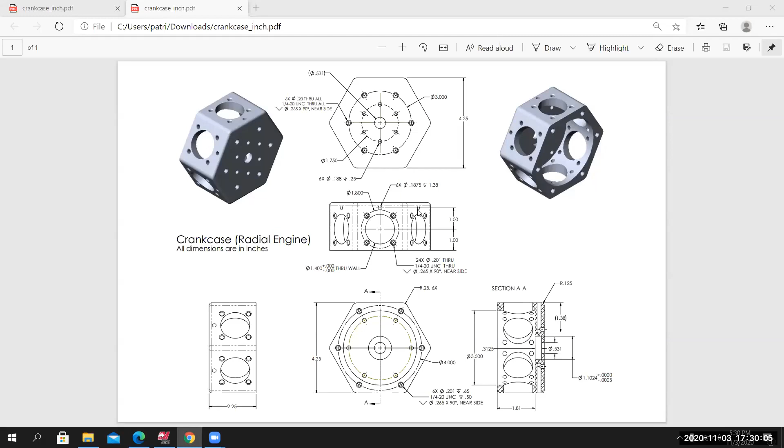So on my screen, I have the drawing for the crankcase radial engine, and I'll be toggling back and forth between the Mastercam file. This is at the stage or the level of completion where we left off. And just to get an idea where we are, I will run the part and verify. You can see I have one stock model and one toolpath. So I'll select the entire toolpath group. You see checks next to the stock model and the toolpath, and I'll run it and verify.

And you'll notice that you don't see the soft jaws inside of verify, or you don't see the fixture inside of verify. And that's probably something that we should bring in just in case we have a collision between the tool and the soft jaw or the tool and the fixture. Verify would be able to point that out for us. So I want to take advantage of that. So I'm going to back out of verify.

And to have these two soft jaws show up inside of verify, here we have the verify icon. To the right of it, simulator options. Click on simulator options. Then it brings up this dialog box. Towards the bottom, you'll see fixtures. Check fixtures. And you'll see it says levels. You want to check the levels where your fixtures or your work holding reside. And in our case, soft jaws.

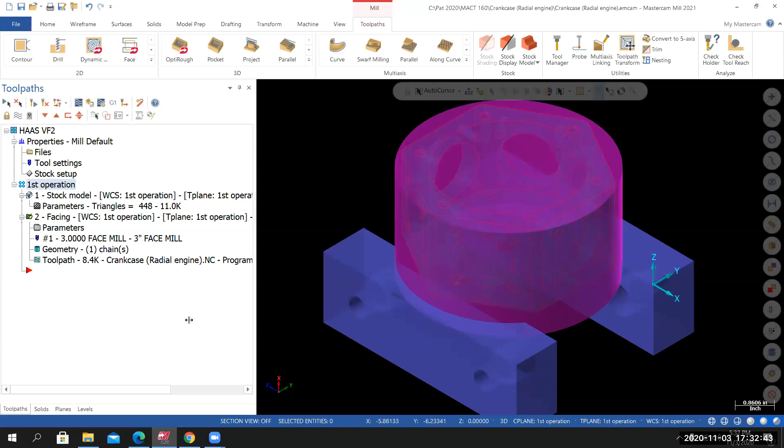All right, nice. Okay, so the next thing that we're going to do is machine the outside profile. And for the time being, I'll make the material level invisible. That way I can easily access the geometry on the part itself. And once I select the chain that I need to drive this toolpath, I'll make the material level visible again. So we're going to use a contour toolpath, and we're going to machine the outside profile.

I'll select it here. I have a question. Yes, sir. Should we make our stock model first? Yeah. Oh, thank you very much for pointing that out. So last class we left off with the toolpath. We didn't create the stock model that reflects the facing operation. So thank you for pointing that out. Let's do that. So I'll go back to the toolpath manager. We've got a stock model that reflects the material prior to machining. Let's make one that reflects the facing operation.

So to do that, go up to the toolpath tab. Select stock model. And for the name, let's call this facing operation. Stock plane, leave it at the top. And for the initial stock shape, we have a stock model that represents our material. So I'll select stock model. And the only stock model that's currently available is the raw stock. From here, I'll go to source operation, and I'll select the toolpath that's actually machining the stock model. So in this case, I've selected the facing operation. I'll select OK.

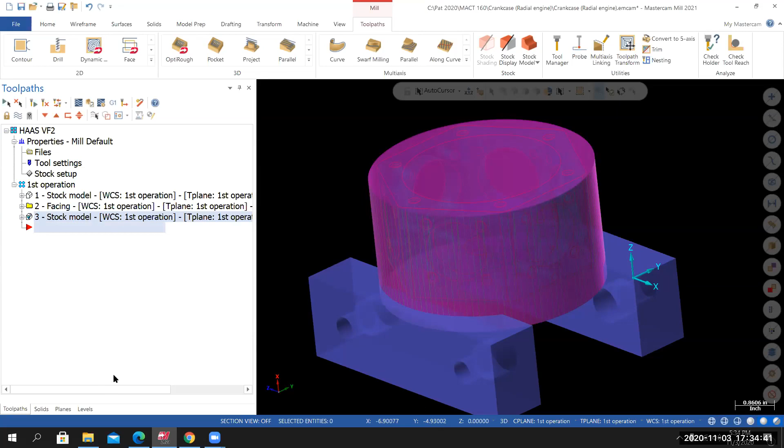Now it's difficult to see because the solid that represents our material is currently visible. It's overlaying the stock model. So if I go to the level manager, make the material level invisible, and I still have translucency turned on, so for the time being, I'll turn translucency off. And you can now see that this gray representation of our material, that's our stock model. So I'll go back to the toolpath manager. With the stock model selected, I can select toggle display. And this would be a good time to save my work.

Thanks, Josh. Thank you. How's everyone doing? All right. Good. Nice.

All right. So from here, let's machine the outside profile, and we're going to use a 1-inch flat end mill. We're going to rough and finish. This is aluminum. We're going to rough and finish with this 1-inch flat end mill. So we'll go to toolpaths. We'll go to 2D toolpaths, and we're going to select contour.

And I'm going to select the outside profile right here. And right now I've got solid chaining turned on. I could use solid chaining, but I'm going to change back over to wireframe chaining. So wireframe chaining, the mode is set to C-plane, and then the selection method is chain.

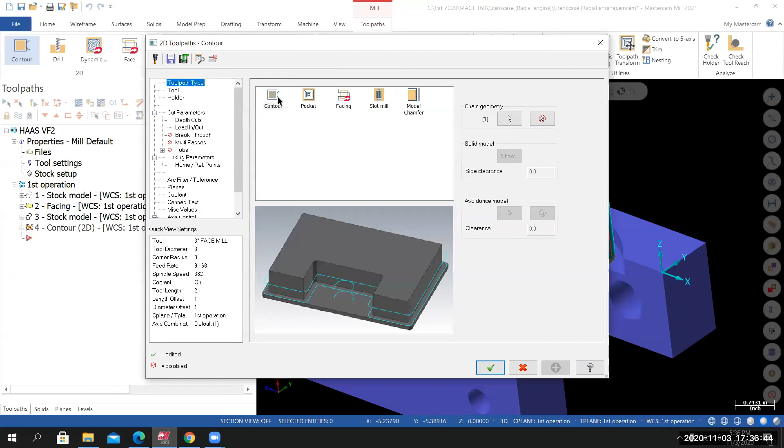From here, go to Tool. We're going to add a 1-inch flat end mill to our tool list. So I'll go to Select Library Tool. The filter is currently active, so I'll select Filter. And I'm going to deselect all tool types and then select flat end mills and set the tool diameter equal to 1. I hit enter.

I'll select OK. And I've got one tool that fits that description. It's tool 297 coming out of the library. When I double click on it, it should be added to your tool list as tool number 2.

How's everyone doing? Good. Doing good? Okay.

We'll need to edit this tool definition. To do that, right click on it and then select Edit Tool. Under the tool geometry page, I'm going to accept the defaults. And I'll just remember that the shoulder length, this is what I'm going to use as my tool projection when I bring in a tool holder. So shoulder length is 2.5. I'll set my tool projection to 2.5. We'll go to the next page.

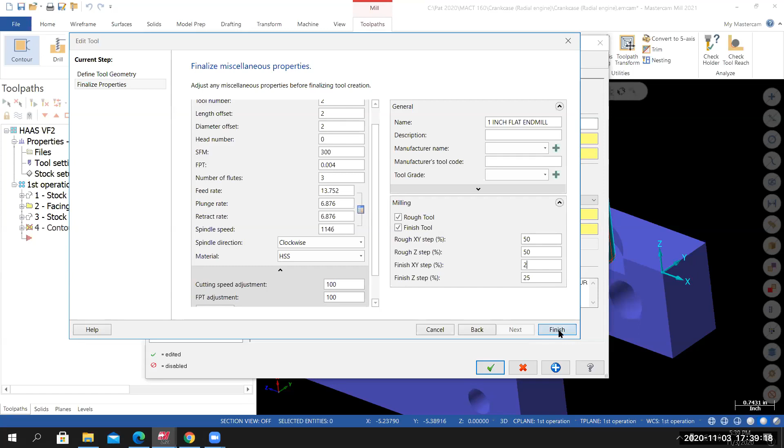For the finish XY step percentage, set this to 2%. And just to recap what we did, we set the number of flutes to 3, we calculated the RPM, we turned the coolant on, and then changed our finish XY step percentage to 2. From here, I'll select Finish. That brings us back to this page.

The RPM is good, but we'll need to adjust the feed rate. Let's set the FPT equal to 1% of the tool diameter. So for the FPT, 1 times 0.01 is 0.01. It's calculating my feed rate at 34.38. Set the plunge rate to half the calculated feed rate. So 34.38, divide that by 2. And also change that up. So I've got my feed rate, my plunge rate calculated.

For the comment, I'll borrow the tool name. I'll paste it down here. Then I'll provide some type of useful information. We'll say machine. And this could be all caps. Once it gets converted into an NC file, it's going to be all caps anyway. So let's keep my caps lock on. Say machine outside contour. And I've got rapid retract checked. And that'll complete everything we need to change on this page.

How's everyone doing? Pretty good. Good. Thank you.

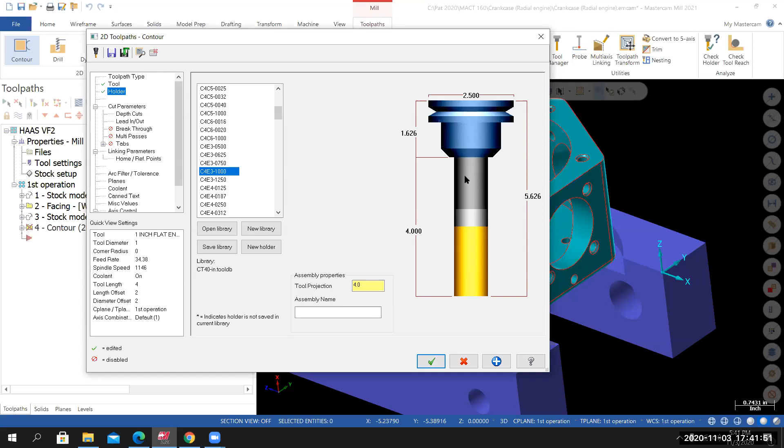And we're looking for a solid type tool holder. So this will be a C4, I'm guessing an E3-1000. So C4 E3-1000. This will be a solid type tool holder. It'll have a set screw right here, and the set screw will need to land on a flat that's ground onto the shank of the tool. For the tool projection, set it to 2.5.

And something I didn't check, and I should have checked: the cut length of this tool. I have a question. Yes, sir. How do we know our tool holder is not going to hit the top of our part? That's what I'm thinking about right now. I didn't check the cut length.

Now I'm throwing it in reverse, and I'm thinking the cut length needs to be greater than the length of the part right here. And if all else fails, we missed it, hopefully we would catch it in backplot, and we would definitely catch it in verify. So let's back up a little bit. Well, first off, we got a couple of things that we can check. Here's the drawing.

I'm in the middle of something, so it's not letting me go there. I'm looking at the drawing on my other screen. The thickness of the part is 2 1/4. So let's go back to the tool, edit the tool. And you see the cutting length? We're going to come up short. So we're going to have to order a special tool for this. We're going to need a greater length of cut. And without looking at a tool catalog, I can only guess.

So let's do this. Let's set the cutting length to 2.5. And then let's set the overall length of the tool to 5. Now, what you would need to do is look this up in a tool catalog and get the exact numbers before you fill all this information out. I'll set the shoulder length to 3. And this will become our tool projection right there. So the tool projection will match our shoulder length. These numbers I pulled out of the air. What's important is that the cutting length is greater than the depth of the contour.

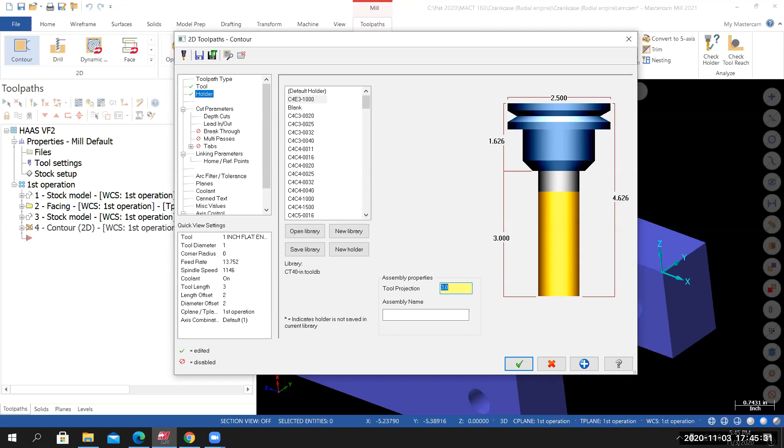Manuel, you good? Yeah. Okay, cool. I'm getting a lot of background noise from you, so I'm muting you. Oh, yeah. Okay. So don't take offense. I'm just muting you because I'm getting a lot of background noise. But if you got a question at any moment, unmute yourself and feel free to ask. Okay, definitely. Okay, thank you.

All right. So from here, we're on the cut parameters page. Compensation type, we're going to use wear in this class. For the compensation direction, we use cutter comp left. We'll accept the defaults here. I'll check real quick. Make sure contour type is set to 2D. And then go down to stock to leave on walls and stock to leave on floors. We'll set these values to 0. We're going to machine right up to the model. So that'll complete this page.

We'll go to depth cuts. I've got depth cuts turned on, and the default setting that we're using, remember when we checked use tool, step, peck, and coolant? So the maximum rough step down is 50% of the tool diameter. So in this case, 1/2 inch. And I've got keep tool down checked. This will prevent it from retracting to our clearance plane after each depth of cut.

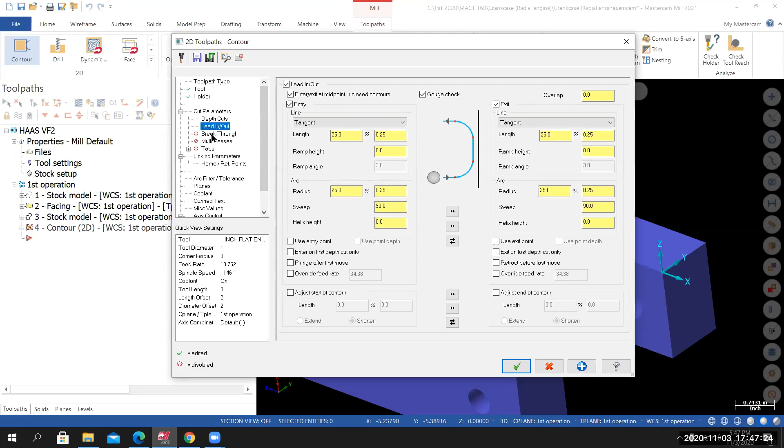So from here, I'll go to lead in, lead out. These are my default settings, 25% for the line and the arc on the entry and the exit. So this page is good. I could turn breakthrough on, and that would just tell it to go slightly beyond what we identify as the bottom of the part. Doesn't hurt. So let's add 20 thousandths for a breakthrough.

For multi-passes, let's activate multi-passes. Let's set our number of finished passes to 1. The spacing for our finished pass is 20 thousandths. That's coming from that XY step over percentage that we set back in the tool settings.

And I'm also going to check machine finish passes after, let's see here. Keep tool down, machine finish passes after roughing all contours, machine finish passes. Oh, right here. So finish passes. This is a slight change with this release of Mastercam. Now where it says finish passes, it's a drop-down menu. I'll set it to final depth.

So it's going to do several depths of cut, intentionally leaving 20 thousandths on the walls. And then when it gets to its final depth of cut, it'll do one rough pass. And then it'll go in and it'll do one final pass where it removes the 20 thousandths all in one shot. From here, I'll also check keep tool down.

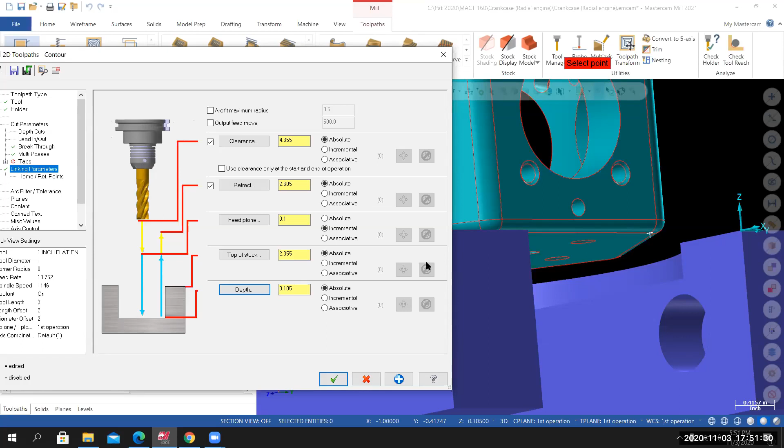And you can see that the bottom of the part is 105 thousandths above the top of the vise. So we need to be careful. We want some clearance between the part and the vise. We don't want to machine into the vise. Just remember, we did use a breakthrough of 20 thousandths. So in reality, the Z position will only be 85 thousandths above the top of the jaw, which is still plenty of clearance. Just be aware of it. So from here, I'll select OK.

I'll look at it from an isometric view. And with just this toolpath selected, I'll run it in backplot. There were some issues with the tool holder, so let's make the tool holder visible. And if I hit the S key repeatedly, I can single step through the whole process.

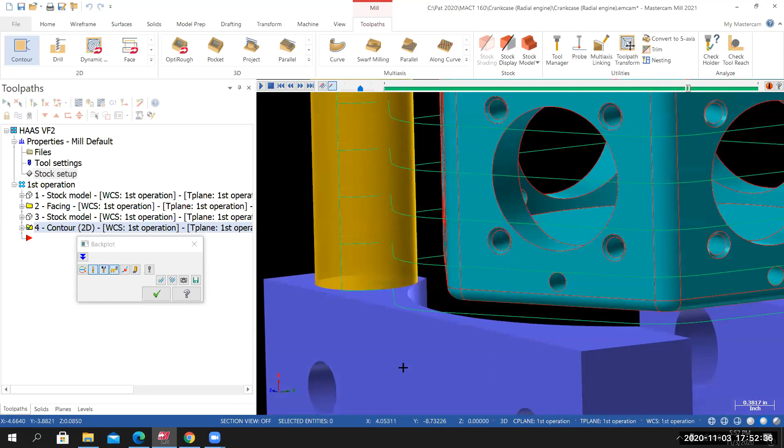So it's making these roughing passes, and it's intentionally leaving 20 thousandths of material on the wall. And there's our third depth of cut, there's our fourth, and there's our fifth. And this one brings us 85 thousandths above the top of the jaw. It'll do one roughing pass, and then it's going to reposition itself and go in for one finish pass at the final depth of cut. And you can see that it's stepping 20 thousandths closer to the part. And then it retracts away from the part.

So I didn't see anything out of the ordinary. I'm not seeing any green lines or feed moves or rapid moves going through the vise or the part. So I'll exit out of backplot. I can toggle off the visibility of the selected toolpath. I'll select toggle display. I'll look at it from an isometric view. And this would be a good time to save my work.

How's everyone doing? Good. Okay. Nice. No issues? Nothing I can help resolve?

All right, so from here, I save my work. Select the entire first operation toolpath group, and then run it in verify. Stop condition collision is still turned on. And then I'll select play.

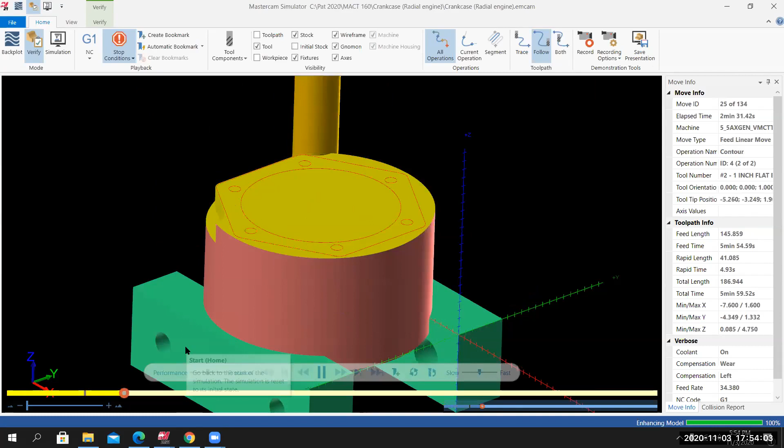Looks good. I'm comparing the machine model to the wireframe representation of the part. If I zoom in down here, you can't see the geometry that represents the bottom of the part. So I'll change over to a translucent view real quick: where it says visibility, select stock, and it goes from a check to a square in this box. Now, if I look at it from a front view

and I zoom in, here is the bottom edge that we machined to, and here is the bottom of the part. So there should be a 20 thousandths gap between the two. We told it to break through 20 thousandths. And that's okay as long as we don't cut into the jaw of the vise. Even with soft jaws, if you cut into them, it's just a mess. So try to avoid running into them.

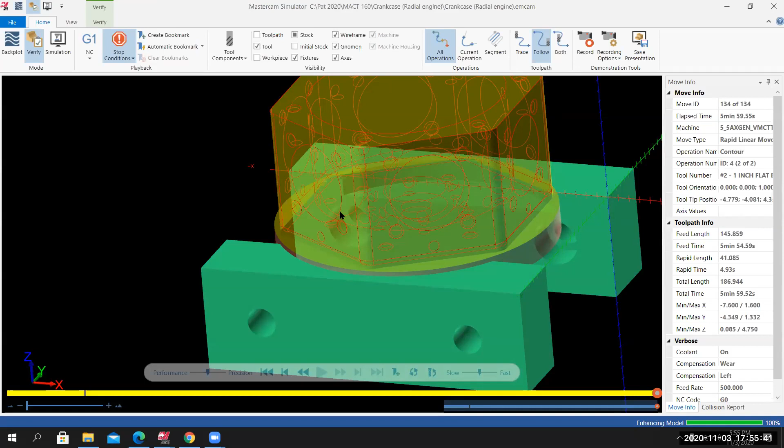And one thing I will recommend, if you ever cut soft jaws on the machine, I highly recommend deburring them while they're on the machine. Don't take them off, just deburr them while they're on the machine. You'll save your operator a lot of grief, because I've been in situations where people cut soft jaws, they don't deburr them, they go into production mode, and next thing you know, the operator gets injured. So it's always a good idea to knock off any sharp edges created from the machining operations.

So from here, I will go back to a shaded view. I'll close out of verify. I'll look at it from an isometric view. Let's now create a stock model that reflects the contour operation. To do that, I'll make sure the insertion arrow is at the very end of my toolpath group. I'll go to the toolpath tab, and then I'll select stock model. For the name, let's call this contour outside profile.

Just make sure you use something that makes sense. For the initial stock shape, once again, I'm going to use a stock model from the previous operation, the facing operation. And then for the source operation, I'll select this new contour toolpath. I'll select OK. And there's a stock model that reflects all of our machining operations up to this point. With the stock model selected, I'll toggle off the display.

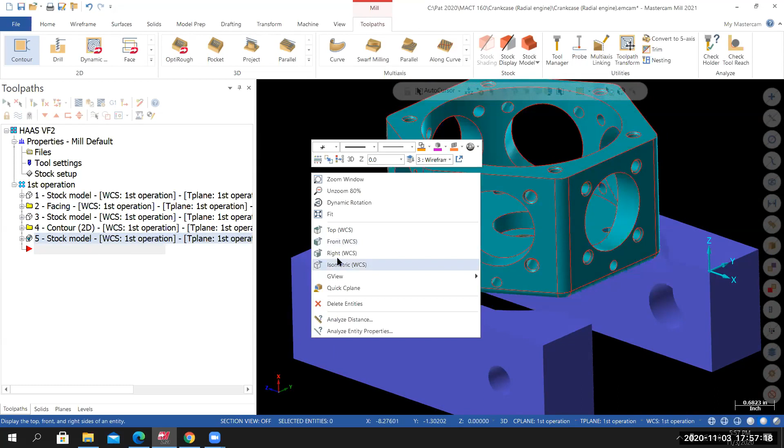How's everyone doing? Doing good? Yeah, we're good. Nice.

All right. So now I'm looking at this part, and we've got a big pocket that we need to machine. The problem with this pocket is the chips don't really have a good place to evacuate to, and you'll get a lot of recutting of chips in a situation like this. So something we could do to alleviate that problem: we've got a hole that goes all the way through the part. So why don't we drill this hole so that it goes all the way through the part and all the way through the material?

That'll give the coolant somewhere to drain, and when the coolant drains, it could carry out some of the chips building up inside of this pocket. There's no guarantee that all the chips are going to get evacuated, but it would probably help. So let's create 6 pilot holes with a 1/2-inch diameter spot drill. We'll create 7 actually. 6 will be used for the drilled and tapped holes, and 1 will be used at the center of the pocket, and we'll drill through with a drill equal to the diameter of this hole.

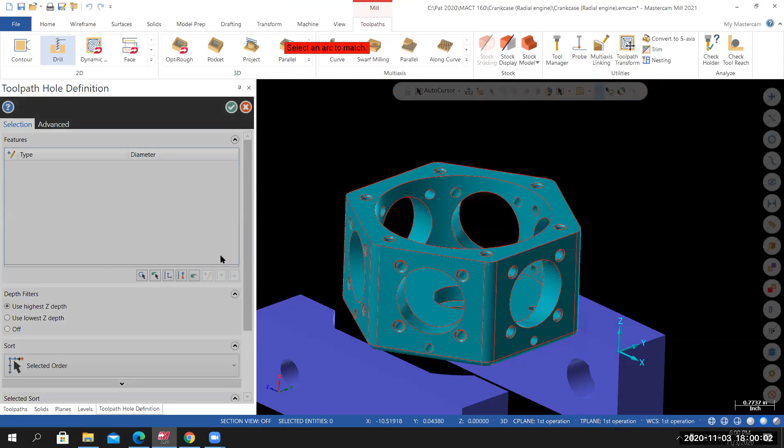Now we're getting asked to select one or more entities to add to or remove from the features list. So this is the features list. What I'm going to do is select mask on arc. And then I'm going to select this circle right here, not the countersink. Actually, I will select the countersink. And it says use window select or Control A or the arc quick mask to find matching arcs. I'll just select this icon right here, the upper half of select all arc entities.

No, I don't like the looks of this. See how it's selecting the ones on the bottom of the part? Should not have done that. Yeah, that would be a bad thing. See that diagonal line going to the bottom of the part? So I'll try that again. So if you're in the same situation as me, right click, delete or delete all.

I'll select one of the circles. Oh, it's a solid arc. That should work. Over here, what are my options? Copy previous points. And actually, this thing's giving me some grief. So let me try this one more time. I'm just window selecting. And that didn't work well at all. See how it's grabbing that. So let's do this. Delete all.

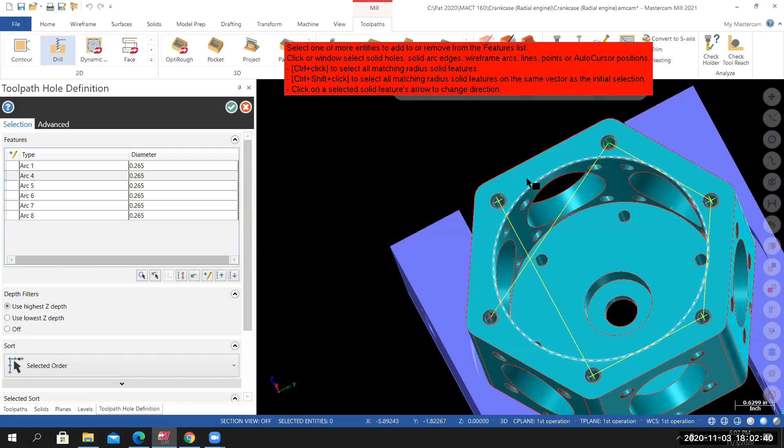And I'm going to carefully select the circles. When you select the circle, make sure the auto cursor isn't grabbing onto a quadrant. Make sure it's grabbing the center. You'll know it's selected properly when you see a point appear at the center of the drilled hole. Now that's not correct. You see that? So auto cursor point, delete. And the solid arc too, I'm going to delete this one too. Making a big mess of it. So I've got the 7 points selected.

For the sort, I'll use a rotary sort, this first one. Select the center point. That's weird. All right, that's cool. So it starts here, and it goes in this order. Then when it gets to this point, it drills the pilot in the center of the 3.5 diameter hole. And there should be 1, 2, 3, 4, 5, 6, 7 points total. So that was a little bit more difficult than I intended it to be. How's everyone doing with that?

How'd you click it so it was on top of the part? I had to select the points. Usually what it does, it's like a mask plane or a plane mask. It only selects circles that are planar. And for whatever reason, it was grabbing points all over the place.

So what I ended up doing, I cleared out all the selected points from this field, and then carefully, when you zoom in and get close to a circle, you want to make sure you're locking onto the center point. Once you left click on it, you'll see where that point is. And if it's on, say, a quadrant or a midpoint, you'll have to remove that selection from this field and then reselect it. It's kind of a pain in the ass. Yeah. How's everyone else doing?

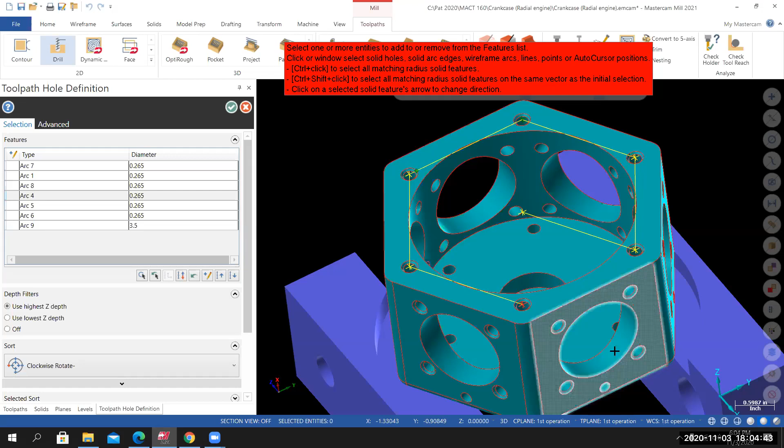And when we select the points to drill through the part, we select the center of the top of the part, right? That's what I did, yes. Yeah, because at first I selected the bottom and it went through the part. Yeah, mine was doing this diagonal move to these holes on the bottom. So that's not what we wanted. That would have caused a big problem. All right, so once you get to 7 points added to this field, select OK. That brings up the parameters for the drilling toolpath.

Let's go to the tool. We're going to add a 1/2 inch 90-degree spot drill to our tool list. So go to select library tool. You can see that the filter is still active. It's checked here. So select the filter icon. I'll start by deselecting all tool types, and then I'll select spot drill. For the tool diameter, I'll set it equal to 0.5. So spot drill equal to 0.5. I'll select OK. I've got one tool that fits that description. I'll double click on it, and it's added to my tool list as tool number 3.

We'll need to make some changes to the tool definition. So right click on the tool and then select edit tool. I'll start by changing the tool geometry. For the cutting length, I'll match the cutting length to the drill tip length. So set this to 0.25 and then set the shoulder length to 1. That'll complete all the changes that we need to make to this page. From here, select next.

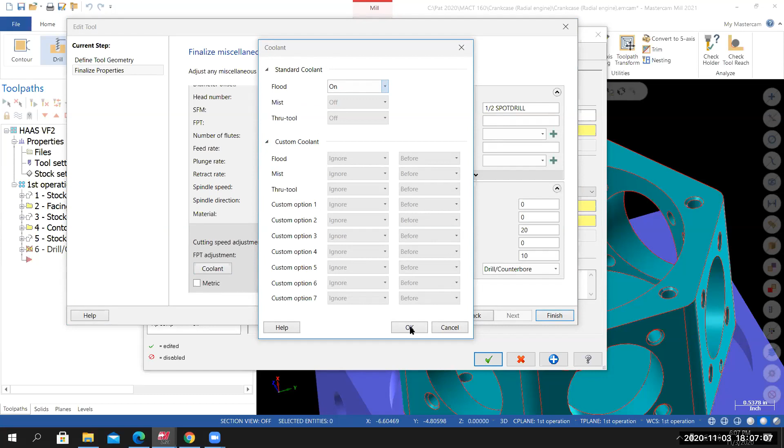So did we set our overall length to what, 4 or 5 again? I left it alone. The current length of this is fine. Okay. Yeah, we're not going into the bottom of the pocket, so the current length will work. Okay. All right. So from here, I'll select finish.

The RPM is based off of this 150 SFM. And then the FPT. So when you're dealing with drills, think of the FPT as FPR. So set this to 2% of the tool diameter. So the tool diameter is 0.5 times 0.02. That's setting my FPR to 0.01, or 10 thousandths of an inch. My feed rate is calculated at 11.46 inches per minute.

From here, provide some type of comment. I'll borrow the tool name, I'll paste it down here, and we'll say drill all. It could be all caps once again. And that'll complete all the changes that we need to make to this page.

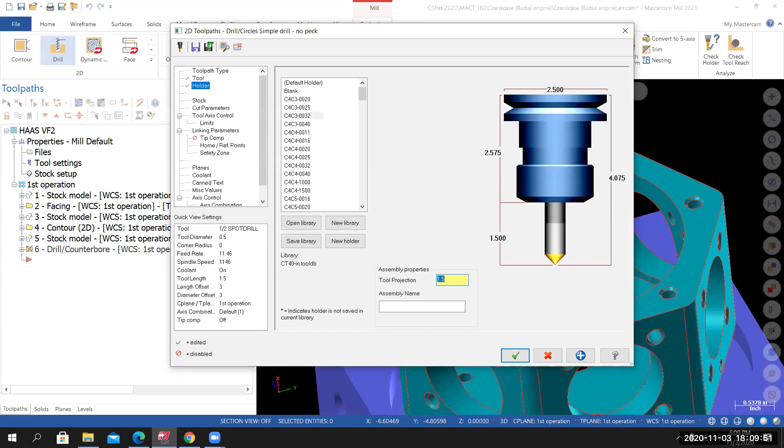So from here, go to the holder. And let's use a Cat 40 ER32 tool holder. Select Open Library. Go to Cat 40 inch, and then select Open. Use a C4C3-0032 and set the tool projection to 1.5. So C4C3-0032, this is an ER32 tool holder. Tool projection, 1.5 inches.

From here, go down to cut parameters. And I'm just checking to make sure that the cycle is a drill / counterbore with the dwell value set to 0. This will create a G81 drilling cycle inside of our NC file. From here, go to linking parameters.

Let's set the clearance plane to 2 inches above the top of the part. So I'll start by turning on clearance. I'll set it to absolute. I'll select the clearance icon. This allows me back into Mastercam, and I can select something that I can lock onto that represents the top of the part. So I'll lock onto this endpoint, left click. It places that Z value in this field, and then you can just type in +2.

Now, if you don't like the number, it's 4.355. You can round it to a slightly cleaner number, call it 4.5, something like that. I've got that set to absolute. I will check use clearance only at the start and the end of the operation. For my retract, I'll set this to 0.1 incremental.

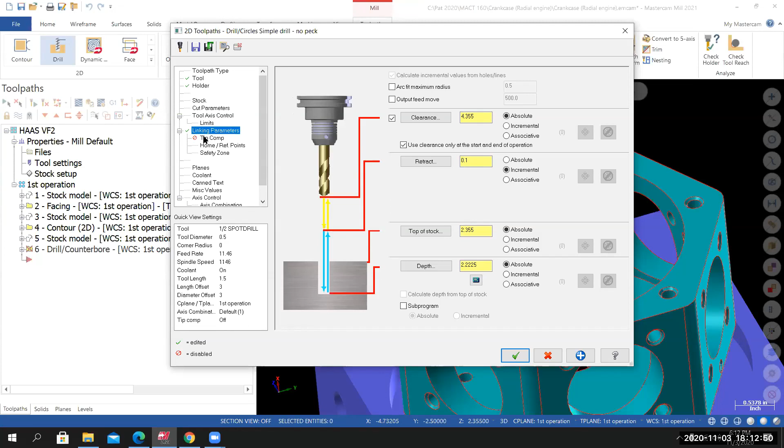Make sure you don't have tip comp turned on. I've got it turned off, but you want to double check this. If you leave this on, it's going to drill deeper than you expected, probably scrapping your part. From here, I'll select OK. And with just the new toolpath selected, I'll run it in backplot.

I didn't see anything that's going to be a problem inside of backplot. So I'll exit backplot. I'll toggle off the visibility of the new toolpath. I'll select the entire toolpath group, and I'll save my work. From here, I'll go to verify. Stop condition collision is still turned on. Then I'll select play.

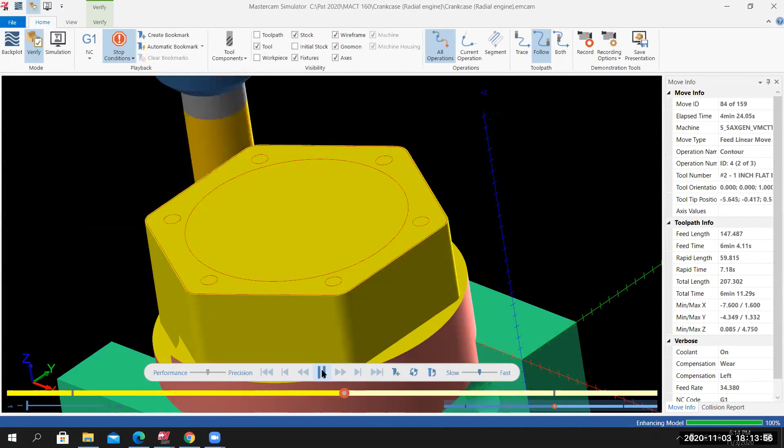If I zoom into the drilled holes, you can see that the machined model matches the diameter on the wireframe, the diameter of that countersink on the wireframe. So that all looks good. So from here, I'll exit out of verify. And this is a good time to save my work.

How's everyone doing? Good. Good? Nice. Okay. All right. So if you have any issues, feel free to ask.

The next thing that we need to do is we need to create the stock model that reflects all of the machining up to this point. To do that, start by making sure that the insertion arrow is where it needs to be. In this case, at the very end of all my toolpaths. I'll go up to the toolpath tab, and then I'll select stock model. For the name, I'll call it drill pilot holes.

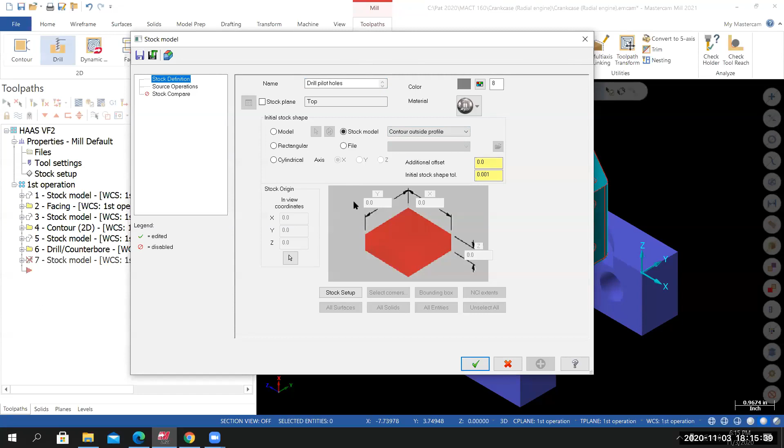For the initial stock shape, I'll use an existing stock model. So I'll expand this menu and I'll select a contour outside profile. And then for the source operation, I'm going to select the new drilling operation. I'll select OK. And you can now see the stock model overlaying our part. Everything looks good. So from here, with just the new stock model selected, I'll toggle off display. And we're now ready to move on to our next toolpath.

How's everyone doing? Okay. No issues? Nice. All right.

So from here, we could go a couple different directions. We could spot drill, we could drill and tap the holes, or we could start machining this pocket. Now, I'm going to machine the pocket, but before I do that, I'm going to drill all the way through with a drill slightly smaller than this hole. And the logic being, I actually want to take a flat end mill and machine this wall right here. I want to get a nice machined surface on this face right here.

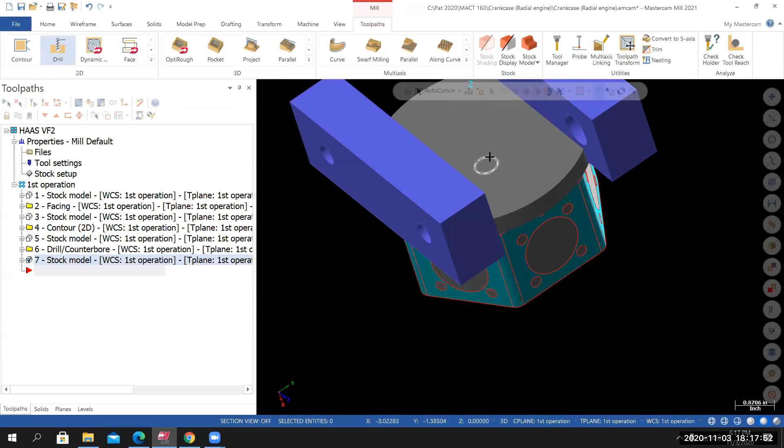Reason being, when we flip this part over, let me make the stock model visible again. When we flip this thing over, we're going to hold it in the vise, and we're going to have this big round disc sitting on top of our part, making it very difficult to set an origin off of. So what I'm going to do is I'm going to drill a hole, run a contour toolpath on it, and make a nice precise hole. It doesn't need to be that precise, but for what I'm using it for, it's going to become the origin for the second operation.

When I'm done with the first operation, I'm going to flip the part over, hold on to, say, this flat and this flat. I have opposing flats, so I can hold it in the vise at that point. I will either drop an indicator in that hole, sweep the hole, and establish my X0, Y0. Or if you have a probe, you can just drop the probe in the center of the hole and run a probing cycle to establish your X0 and your Y0. So we'll talk about that when we get to it.

So for now, let's just take a drill slightly smaller than 0.531 and drill a hole that goes all the way through the part and all the way through the bottom of the material. So let's do this. Let's go to toolpaths, 2D, drill. I could select this circle here. I could select this circle. I'm just picking up the center point. These two holes are concentric. So I'm actually just going to lock onto this top circle.

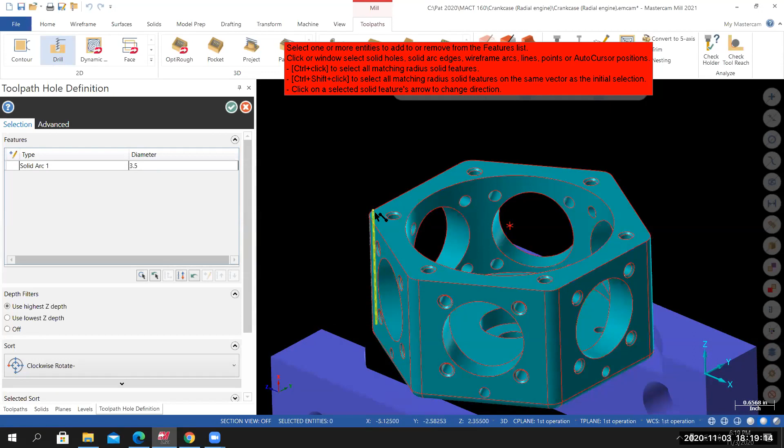Left click. And you'll see a point up here. It's centered on that selected circle. I'll select OK. I'll go to the tool. Let's add a drill that's slightly smaller than 0.531. I'll go to select library tool. I'll go to the filter. I'll deselect spot drills and I'll select drills.

For the tool diameter, set it to less than, and I measured the hole, it's 0.531. I'm looking for a drill that's probably 15 thousandths smaller than 0.531. Let me retype that, 0.531. I'll select OK. And they've got it in ascending order. So smallest to the largest.

Something you can do from this menu, if you select on the diameter right here, I didn't change it. Usually it'll change it from ascending to descending. There we go. So now if I click on diameter, there's the smallest, there's the largest. So it just flips the order that we're viewing them in this menu.

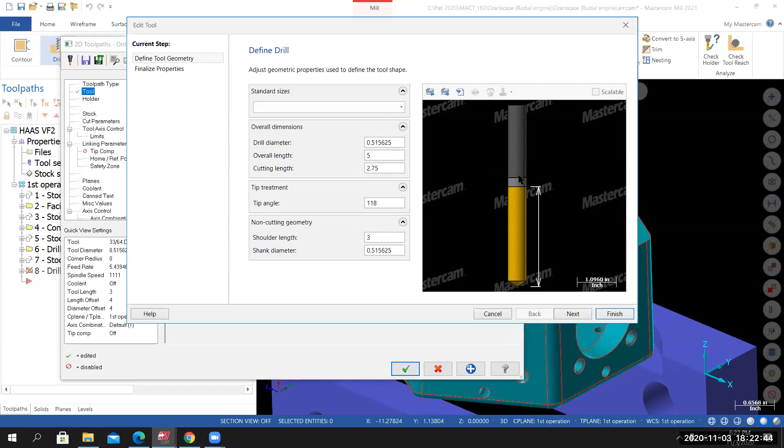Now, in reality, what you would need to do is look at the manufacturer specs for the drill, or you'd have to physically measure the drill that you're using. So I just selected some numbers that would actually work in this particular case. Chances are you would have to actually measure the drill that you're using. From here, I'll select next.

To get Mastercam to calculate the feed rates correctly, set the number of flutes to 1. You can calculate the RPM by selecting the calculator. You can turn on the coolant, select show more options, select the coolant, and then set the flood coolant to on. Select OK. And that should complete all the changes that we need to make to this page. So just to recap, number of flutes 1, I calculated the RPM, and I turned the coolant on. From here, I'll select finish.

In these fields, the RPM's already been calculated. Set the FPT. Think of the FPT as FPR. This is a drill, so FPT is actually FPR. Set the FPR equal to 2% of the tool diameter. So I've got 0.515, and I don't need to carry it to 6 decimal places. So 0.515 times 0.02. It's calculating my feed rate at 11.44.

And let's provide some type of comment. I'll borrow the tool name, I'll paste it down here, and we'll say drill pull through part. And I should make these all caps.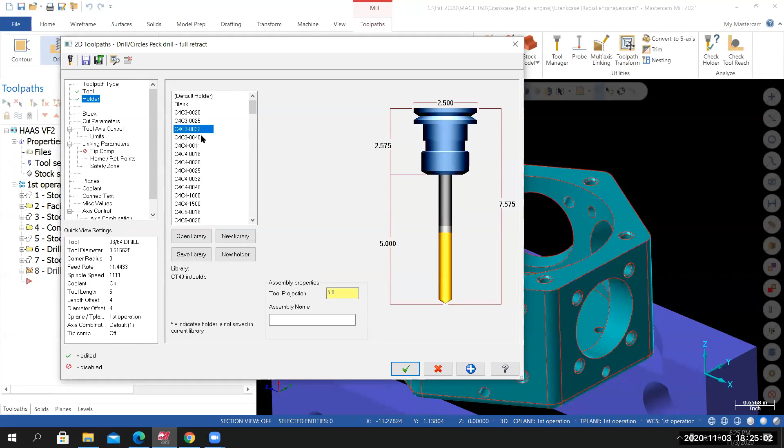From here, go to the tool holder. Once again, we're going to use a Cat 40 ER32. So I'll go to Open Library. I'll open up the Cat 40 inch library. And I'm going to use a Cat 40 ER32, so C4C3-0032. Set the tool projection to 3.5. So C4C3-0032, tool projection is 3.5 inches.

From here, I'll go to cut parameters. The cycle should have changed over to a peck drill cycle. This will create a G83 drilling cycle inside of our NC file. And the peck increment, this will be our Q word. This is equal to the drill tip length.

From here, I'll go down to linking parameters. Now, a lot of these values are carrying over from the last drilling operation that we used. So these are good. I just want to double check the numbers, but I can tell that this is good. This is good. Top of the stock, I don't quite trust it. So I'll select top of stock, and then I'll select something that represents the top of the part.

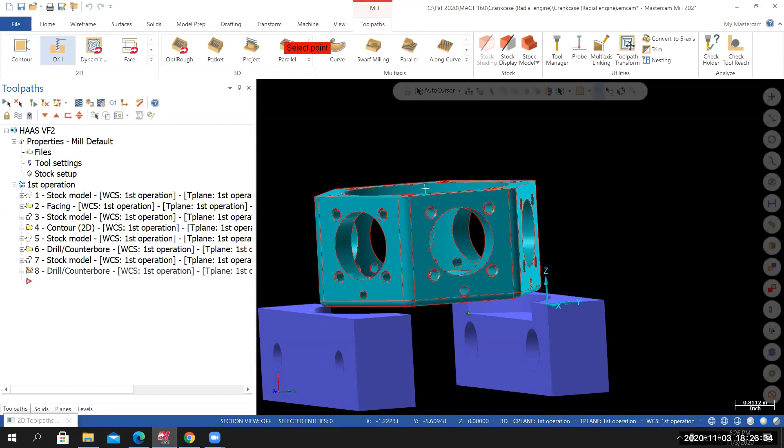And then for the depth, I'll set it to absolute. I'll select the depth icon. And I want to select something that represents the bottom of the material. I need this hole to go all the way to the bottom of the material so that the coolant can drain out. So I could select this endpoint, or I could bring the level manager back, make the material visible, and actually lock on to the bottom of the material.

To get the drill to go all the way through the bottom of the part, I'll need to turn on tip comp. Once you activate it, Mastercam will calculate the additional length for the drill tip and set the breakthrough amount to 25 thousandths. From here, I'll select OK. And I'll make the material level invisible.

I'll go back to the toolpath manager with just that toolpath selected. I'll run it in backplot. Looks good. From here, I'll exit out of backplot. I'll toggle off the visibility of that new toolpath. Good time to save my work.

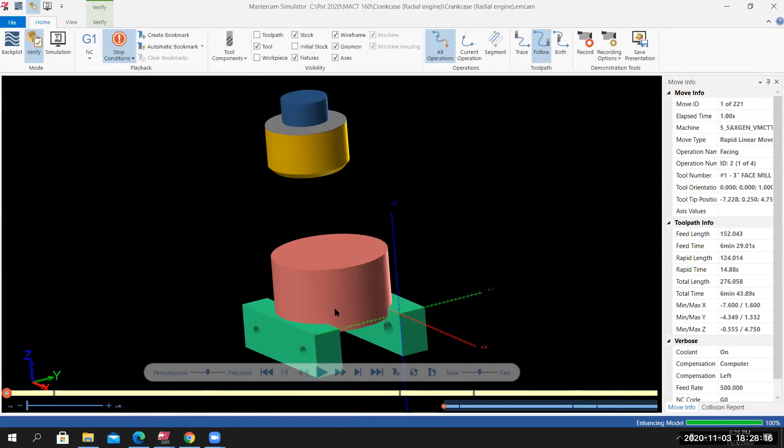And I'll select the entire first operation toolpath group, and I'll run it in verify. Stop condition collision is turned on. I'll select play.

Now, if I back it up a little bit, and I can slow it down, the S key might work also. Yeah, so I'm single stepping. I've got a problem. See that? The cutting length of the drill isn't quite long enough.

Reason being is when I was coming up with my cut length, I was only thinking of the part thickness. I wasn't thinking of the overall length of the material. So when I back this up a little bit, you can see that the shoulder of the drill goes beyond the top of the part.

And the problem with that is we need flutes to evacuate chips. And if the flutes are buried beneath the top of the part and you're drilling for too long, the chips won't have anywhere to go, causing a big problem. So I'm going to need to go back in and modify my cut length of my drill.

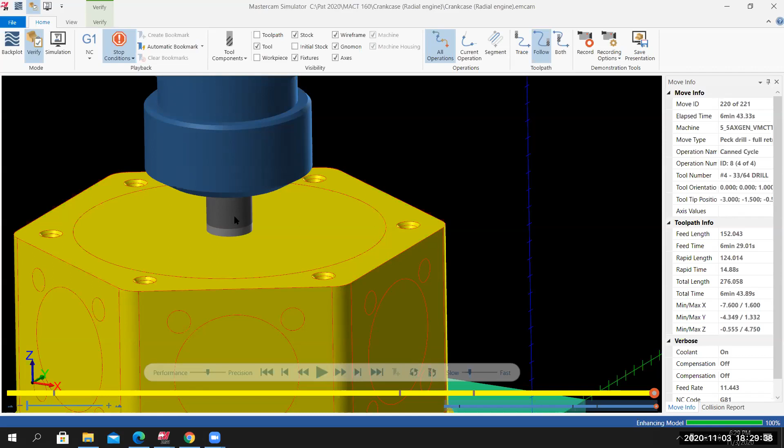So I'll exit verify. I'll go back into the parameters for this toolpath. And actually, I think I can access the tool from here. So if I left click on the tool, let's see where it takes me. Overall length is 5. Shoulder length, we'll set this to 3.5. And then I'll set the cutting length to 3.

Could we analyze the distance of the top of the stock to the bottom? We could. And what you've got to do is just go to Home, Analyze Distance. I select that face, and then I select that face. Didn't quite like it, so let's do it this way. I'll go from center. See if I can lock onto the center here. Oh, I got it right there. See it?

And the distance from the top of the part to there is, and I could have told you now that I look back on it, 2.73. It's 20 thousandths less than the material length that we started with. So 2.73. But that's a good way to double check your work. Let's go back to the tool geometry. The cutting length is 3, and the shoulder length is 3.5. Problem is, when I made a change to this, it's going to change my tool projection. So I'll select Finish. I'll go back to the parameters.

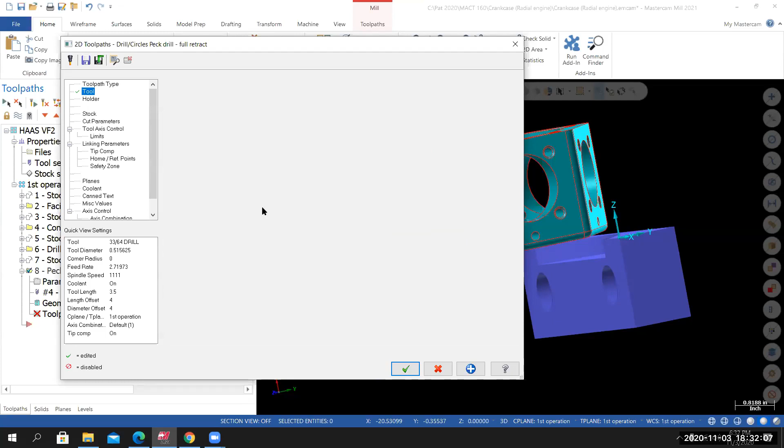Yeah, I changed my feed rate too. So set the FPT to 2% of the tool diameter. So 0.515 times 0.02. And then if I go to the holder, oh, it didn't change it. So at 3.5, we should be good. I'll select OK. I need to regenerate the toolpath. And let's run this in backplot again.

If I look at it from a right side view, and if I make the stock visible, well, there's a couple ways we could do it. We could actually go to toolpath, turn this. Oh, my bad. Not stock model, we haven't created it yet. Toggle stock display.

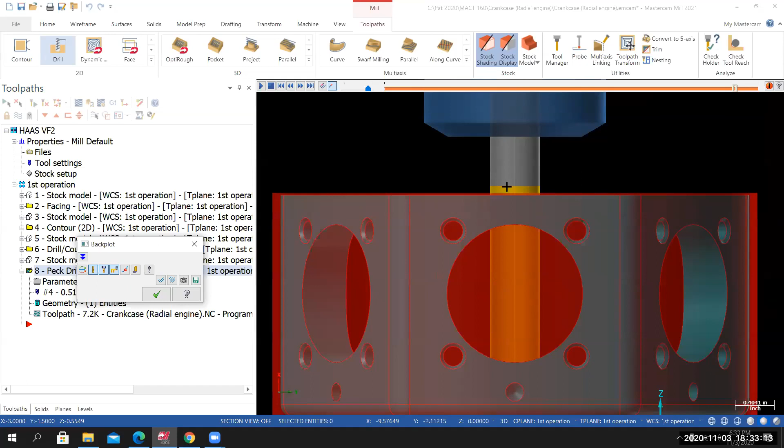And that's what I'm looking for. So you can see that the full diameter goes through the bottom of the part. And then you can see I still have some cut length on the top of the part. I actually have a little bit more than what we're seeing here. So this red area is already gone because we machined to the top of the part with the face mill. All right, so I no longer need to see the stock display.

This would be a good time to save my work. And just to be on the safe side, I'll select the entire first operation again, and I'll run it in verify. Tumble my view. See, the hole goes all the way through the part. Now the coolant will have a place to evacuate, and hopefully it carries some of the chips along with it. All right, so exit verify. Look at it from an isometric view.

The next thing we'll need to do is machine the pocket. And this is one of those scenarios where I could have positioned the pocket after the contour. I have a question, Patrick. Are we going to create a stock model? Yes, we will. I forgot. I got caught up in a thought on how to order these tools. No problem, let's create the stock model right now. Then I'll talk about what we need to do.

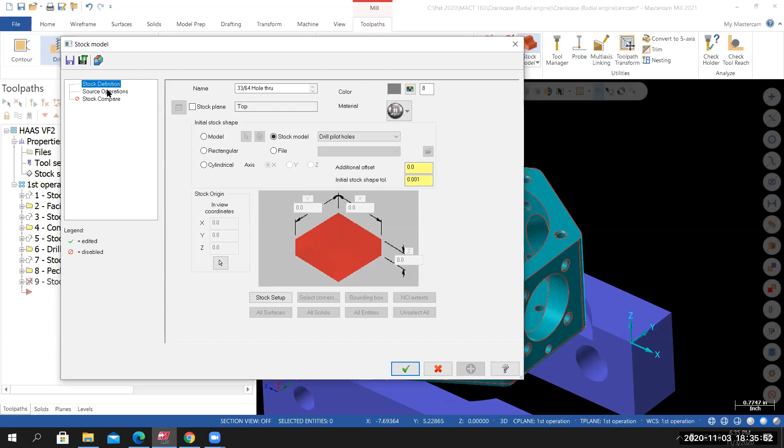For the initial stock shape, I use an existing stock model. I'll select the drill pilot holes. And then for the source operations, I'll select that new drilling operation. I'll select OK. And now you can see that the hole goes all the way through the part.

And I'm rethinking the order that we did this in. We should have faced it, drilled our pilots, drilled the hole through, and then did the contour, and then went right into the pocket using the same tool. So don't worry about it right now. This is extra credit. We're going to call up a pocketing toolpath, and we're going to machine the pocket with a 1-inch diameter flat end mill.

But in hindsight, I would order my tools a little bit differently. Don't worry about it for now. I just wanted to point that out, that if we would have faced it, spot drilled, then drilled, then I could have machined the outside contour and then the pocket. That way I could have avoided a tool change, making it a more efficient program.

But we're all right. So what we're going to do now is we're going to machine the pocket. But before I do that, I'm going to make the stock model invisible. So with just this new stock model selected, I'll toggle off the display and I'll save my work.

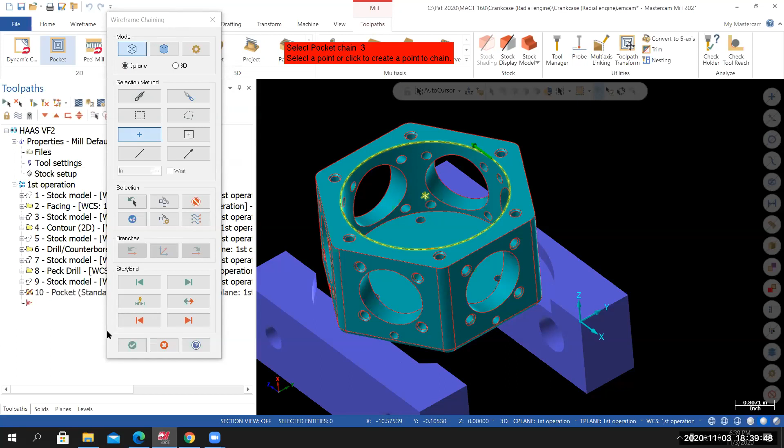So we added 2 items to our chaining list. From here, I'll select OK. You'll see that there's 2 items here. From here, go to Tool. I've got the 1-inch flat end mill selected. The RPM is already calculated, but the feed rate is incorrect. So set the FPT to 1% of tool diameter. So 0.01 times 1 is 0.01. Set the plunge rate to half the calculated feed rate. So 34.38, divide that by 2.

And from here, let's update the comment. It's got some information from the last time we used the pocketing toolpath. This isn't going to work, so what I'll normally do is just copy the name, paste it down here. Let's say machine 3.5, and I'm double checking that, diameter pocket. And that'll complete all the changes that I need to make to this page.

Now the tool holder's already been selected. Cut parameters. Machining direction should be climb. Pocket type should be standard. And for stock to leave on walls, set to 0. Stock to leave on floor, set to 0. Go to Roughing. Use parallel spiral, not parallel spiral clean corners. Use parallel spiral. And then I'll accept the default settings for all of these items down here.

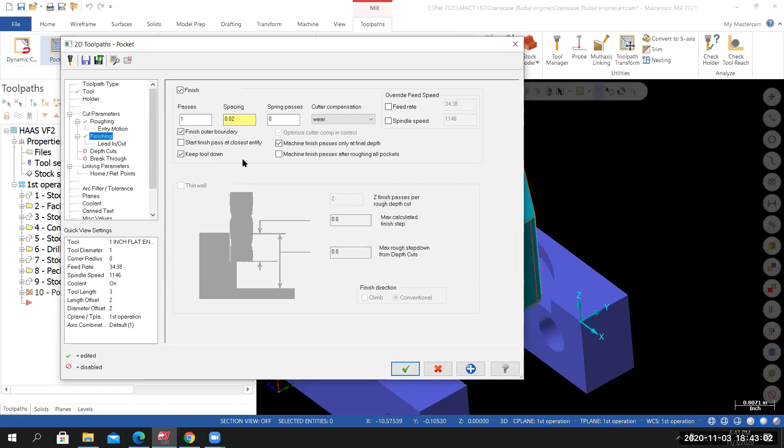Linking parameters. Once again, set your clearance to 2 inches above the top of the part. So I'll turn on clearance. I'll select absolute, and then I'll select clearance. And then I'll let my cursor lock onto something that represents the top of the part. This value is the top of the part. Add 2 inches to it, +2.

For the retract, set it to 1/4 inch above the top of the part. So I'll set it to absolute. I'll select the retract icon. Then I'll let my cursor lock onto something that represents the top of the part. Now this value is the top of the part. Add 1/4 inch to that, so +0.25. Feed plane, set it to 0.1, incremental. Top of the stock, absolute.

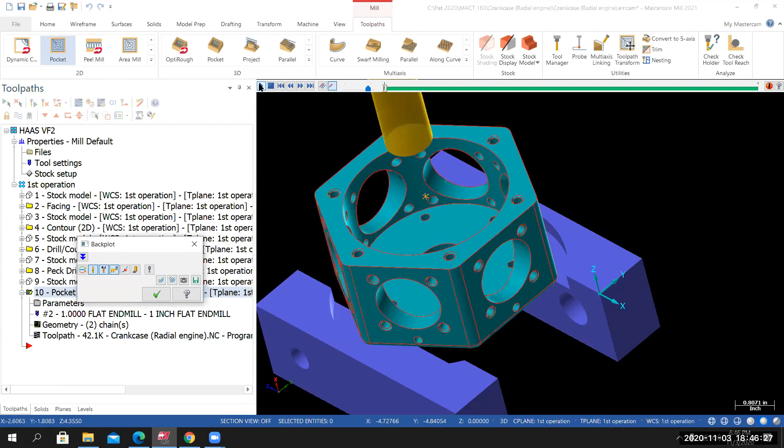One thing that Josh and I were talking about last class, if you go back to the parameters and you go to the helical entry, let's go to entry motion. Change the direction to counterclockwise. Regenerate that. And let's see what it looks like with the entry motion going the other direction. Looks good. Looks better, right? Yeah. And if you slow it down, you can really see what it's doing. So there's the helix. I think it's going to do one more pass. Yeah, I think I like that better.

In my mind's eye, it's climb cutting for the entire machining operation, whereas it was conventional cutting and then it was doing a change in direction, which I didn't like at all. That's changing spindle direction, right? Just the motion. No, the spindle's still going in the right direction. The direction of the tool versus the rotation of the tool is still going in the same direction. So the direction of the tool is changing. Yeah, I don't like it.

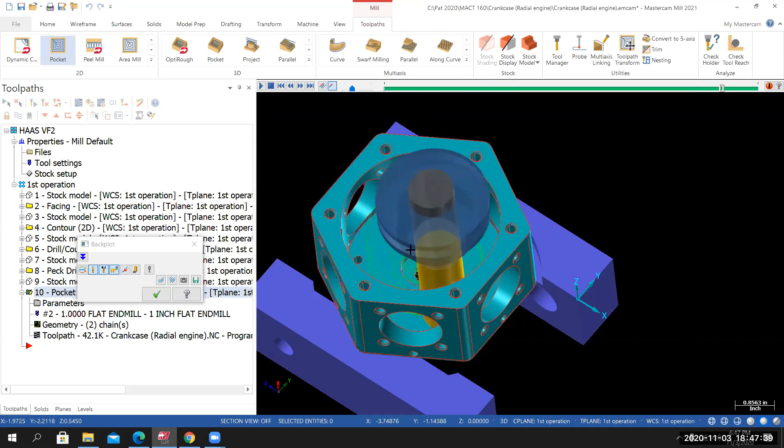I would like to run a test with this on a forgiving piece of material and a tool that I'm not too concerned about. Does that make sense? Yeah. So run a little test and see what the results are. So anyway, I'm going to leave it that way. It looked good inside of backplot, so I'll toggle off the visibility of that toolpath. I'll select the entire toolpath group, and this would be a good time to save my work.

I'll run it in verify. Inside of verify, make sure stop condition collision is turned on, and then run it. I think it looks good. So from here, I'll exit verify.

The next thing we'll need to do is machine a pocket and then a contour, and I would like to do it with the same tool. So if I select this circle and hit F4, the diameter is 1.1024. And then this hole here is 0.515. At least that was the diameter of the drill. Might have drilled a little oversized, a little undersized, but it's in the neighborhood.

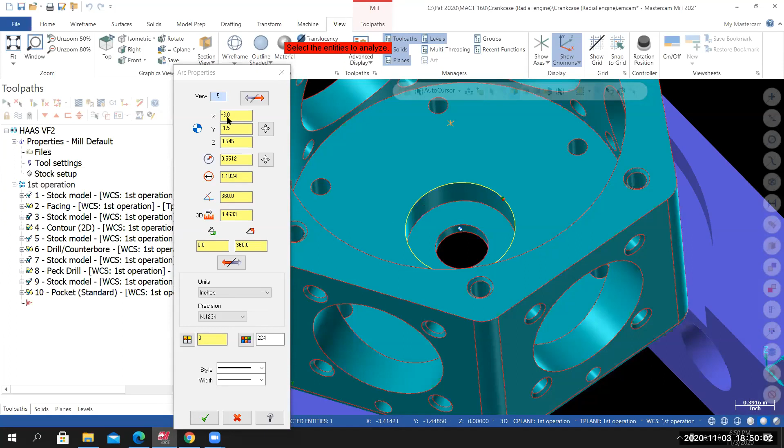I'm either going to sweep it with an indicator or I could drop a probe in there. If you have a probe, you can drop a probe in that hole and then set your XY origin at the center of the hole. So I'll exit out of the arc properties. Let's use a pocketing toolpath to machine this 1.1024 pocket.

So will that all share the same stock model because it's all still a pocketing operation? No, you're right. I need to take a step back and talk about or create the stock model. That's where we're going to go next. After we create the stock model, we'll have 3 separate stock models. I could combine this one and this one, but we're going to create new stock models for each one.

Okay. All good? Just to verify or just practice, verify. You know, through repetition, we're becoming pretty proficient in what we're doing.

Yeah. So let's create a pocket to machine this 1.1024 diameter pocket. We'll use a 3/8 diameter flat end mill to do it. So I'll go to toolpaths, I'll go to pocket. Now it's not available here, so I'll select expand gallery. Select pocket. And the wireframe chaining dialog box appears. I'll start by selecting the top edge of the 1.1024 diameter pocket.

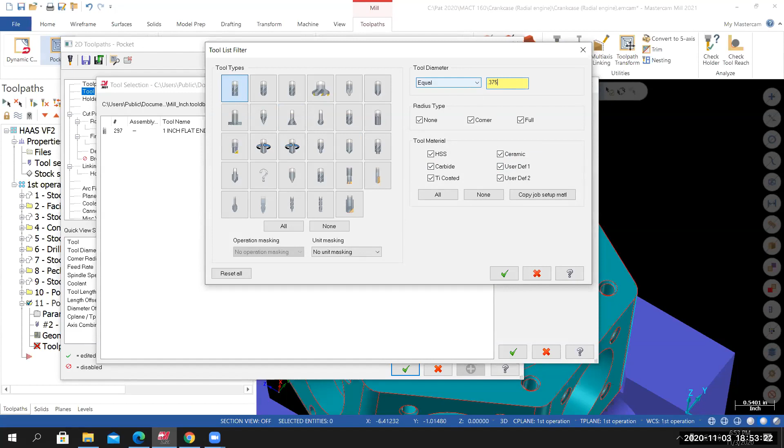I'll need to go into the parameters for this toolpath and start by going up to the tool. We're going to add a 3/8 diameter flat end mill to our tool list. So go to the tool, select library tool. The filter is active, so select the filter icon. And we're looking for a flat end mill equal to 0.375. I'll hit enter. I'll select the green check. I've got one tool that fits that description. I'll double click on it. And it's added to my tool list as tool number 5.

I need to edit the tool definition. So right click on the tool, select edit tool. Now I'm looking at the drawing. The depth of this pocket is 0.3125. So make sure that the cutting length is greater than the depth of the pocket. In this case, it is. Overall length is 2.5. So from here, this page is good. I'll select next.

So did we bring in a new tool for this? Yeah, we're using a 3/8 diameter flat end mill. So add a 3/8 diameter flat end mill to your tool list and then edit the tool. I didn't do anything to it on the first page. The tool geometry, left it alone. So I'll go to next. For the number of flutes, I'll set it to 3. And then I'll select the calculator to calculate the RPM.

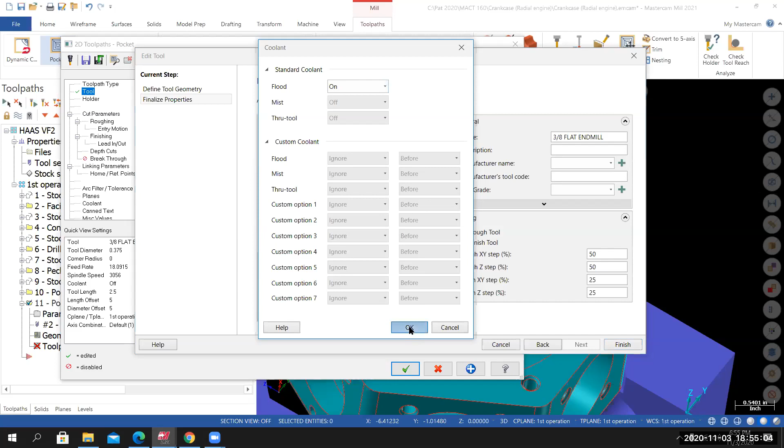To turn the coolant on, I'll select show more options, select coolant, and set the flood coolant to on. I'll select OK. And then for the finish XY step percentage, set this to 2. So number of flutes 3. RPM has been calculated, the coolant's on. So from here, I'll select finish.

And RPM is good. Let's set the FPT, the feed per tooth, to 1% of the tool diameter. So the decimal equivalent of the tool is 0.375 times 0.01. So 1% of the tool diameter. It's calculating my feed rate at 34.38. Set the plunge rate to half the calculated feed rate. So 34.38, divide that by 2.

And let's provide some type of comment. So I'll borrow the tool name. I'll paste it down here. Let's say machine 1.1024 diameter hole, or diameter bore.

That'll complete all the changes that I need to make to this page. From here, I'll go to holder. We're going to use a solid type tool holder, so it'll be Cat 40. I'll go to open library. I'll select Cat 40 inch. I'll select open.

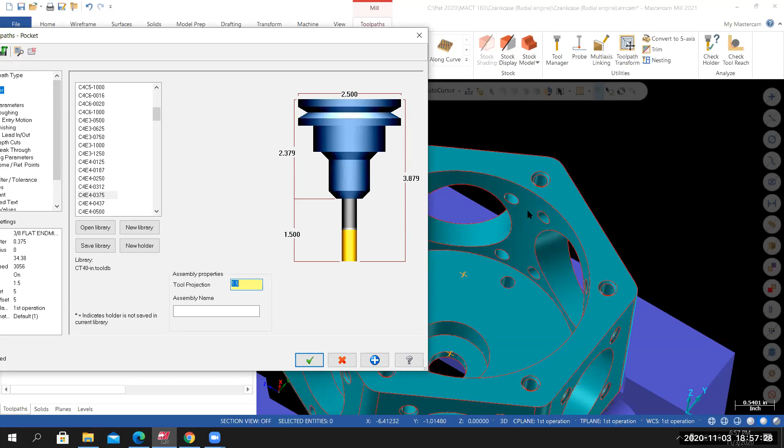And from this list, let's choose a C4 E4 0375. It's not available in the E3, so go to a C4 E4 0375. And let's set the tool projection to 1.5. Now this is going to be close because we're dropping this tool and tool holder into this pocket, and we don't want the tool holder to come into contact with this inside wall. So C4 E4-0375, tool projection 1.5.

Go to cut parameters. Now, a lot of these values are carrying over from the last time we used the pocketing toolpath, so they should be good. I'm not leaving anything on the walls. I'm not leaving anything on the floors. For roughing, once again, I'm using parallel spiral. I'll accept the default values here. Entry motion. Once again, these values should be good.

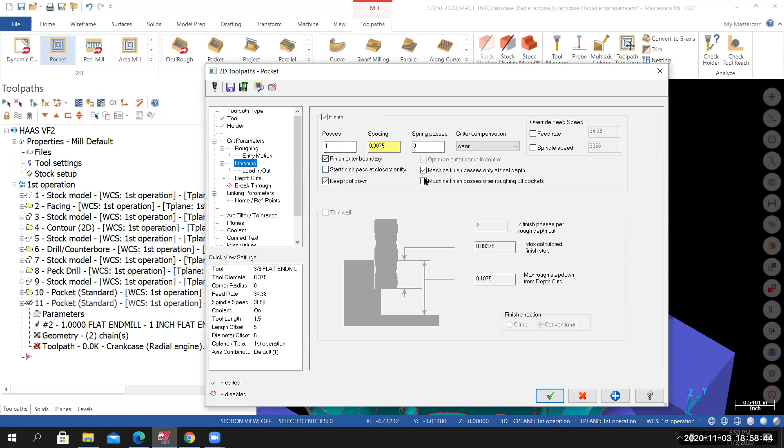Now, something that we could do: because there's already an existing hole, we could increase these values, but we'll just leave it alone. So helix, helical entry, minimum radius is 25%, maximum radius is 50%. Finishing, I've got finishing activated. I've got number of finish passes set to 1. The spacing is set to 2% of the tool diameter. And then I'll accept all the default values. Lead in, lead out. Once again, this should be 25% for everything. These are my default values.

Depth cuts. I have depth cuts activated. If the pocket is deeper than half the tool diameter, it will do it in multiple depths of cut. Breakthrough. Make sure breakthrough is turned off. This will cause it to machine the pocket too deep. And then go to linking parameters. All of these values are carrying over from the last pocketing toolpath.

For the top of the stock, make sure it's set to absolute. Use the top of stock icon, and you're going to select the top of the 1.1024 diameter pocket. And then for the depth, you'll select the depth icon. Before you do that, though, make sure it's set to absolute. Select the depth icon, and then let your cursor lock on to the bottom of the circular pocket. And that should complete all the changes that we make to this operation. I'll select OK.

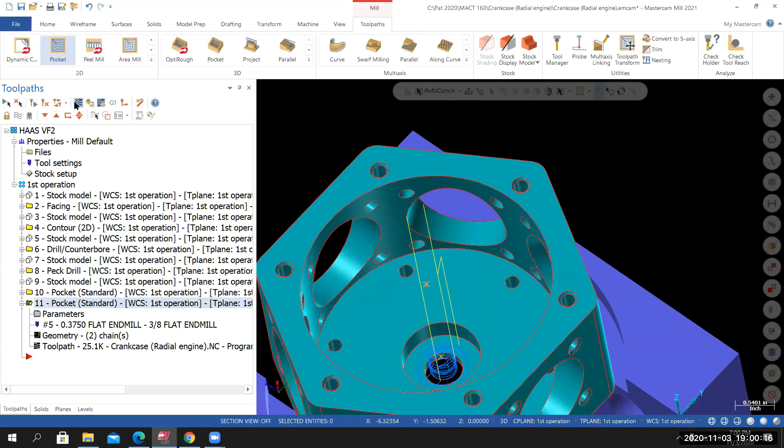I'll need to regenerate the toolpath. I'll select regenerate all dirty operations. And then with just this toolpath selected, I'll run it in backplot. I'm going to look at it from a top view. And what I'm looking for is contact with the tool holder. Now, this is the largest diameter of the tool holder. But you've got to remember, this is what's more likely to come into contact with it.

So if I look at it from a top view, if the larger diameter doesn't come into contact with this inside wall of the pocket that I'm tracing with my cursor, we should be good. So I'll select play. Yeah, so you can see that we've got clearance. It gets close, but at no point am I seeing the largest diameter of the tool holder break out of this diameter that I'm tracing with my cursor. So I think we're good.

I'll exit out of backplot. I'll toggle off the display of the selected toolpath. I'll select the entire toolpath group. This would be a good time to save my work. And I'm going to run the entire toolpath group. And I forgot to create a stock model, I can see that already. So we'll backtrack, but I'm going to run this entire toolpath group inside of Verify. Stop condition collision is turned on. And I'll select play.

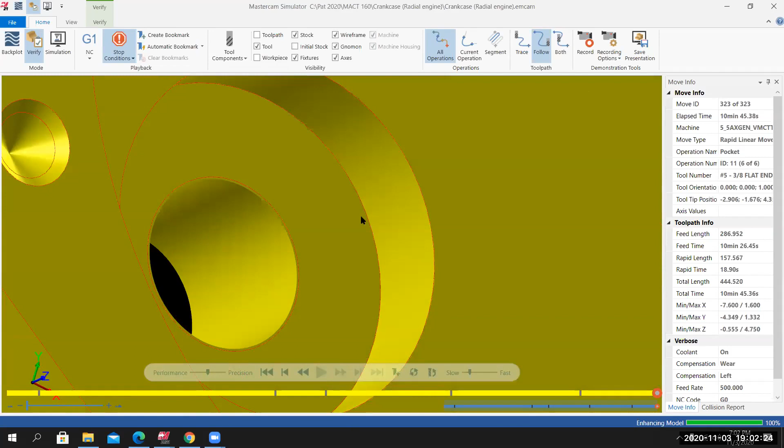All right, so pocket looks good. If I zoom in, I can compare the machine model to the wireframe model. Everything looks to be correct. So from here, I'll exit out of Verify. I'll look at it from an isometric view, and I'll save my work.

I need to create a stock model for two operations. I'll start by creating the stock model for the big pocket. The insertion arrow, you can see that's currently at the very end of the toolpath group. I'll bring it up one tool; I'll place it in front of the last toolpath. I'll then go to stock model.

And I thought I created the stock model for this one. What did I do? No. I thought I named one 3.5 bore. What's this one called? Hold on a second. Yeah, there's the through hole. That's your description for your tool. Yeah, this is a stock model. See the 3.3, the 33. That's your drill. You machine, highlight your pocket and see what you named your tool description. Got it.

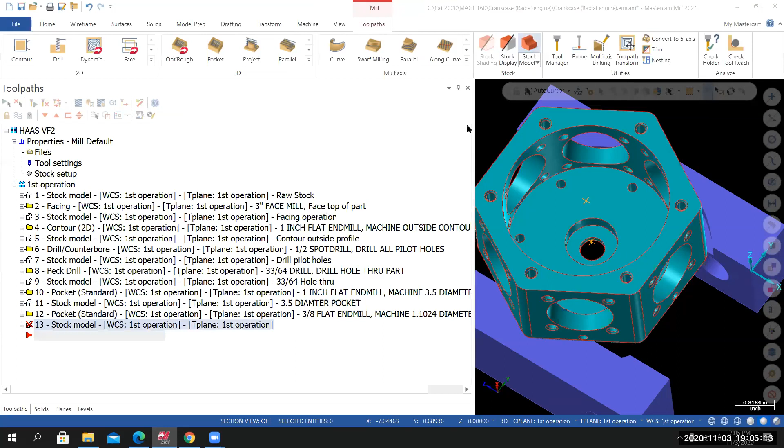I'll toggle off the visibility of that stock model. I'll reposition my insertion arrow. From here, I'll go to stock model again. Go to stock definition. This will be called 1.1024 diameter pocket. For the initial stock shape, I'll set it to the 3.5 diameter pocket. And I spelled diameter wrong there, so I'll have to go back in and fix that.

Forgot to select the source operation, so I'll go back into it. I'll need to regenerate it. Now there's the stock model. No, I didn't name this one properly. So yeah, right there, that one. So I'll expand that, go into the parameters. Better.

All right, so I've got two pocketing operations. We'll need to program a small contour toolpath for this existing hole. And then we're going to drill, tap, and chamfer all the sharp edges.

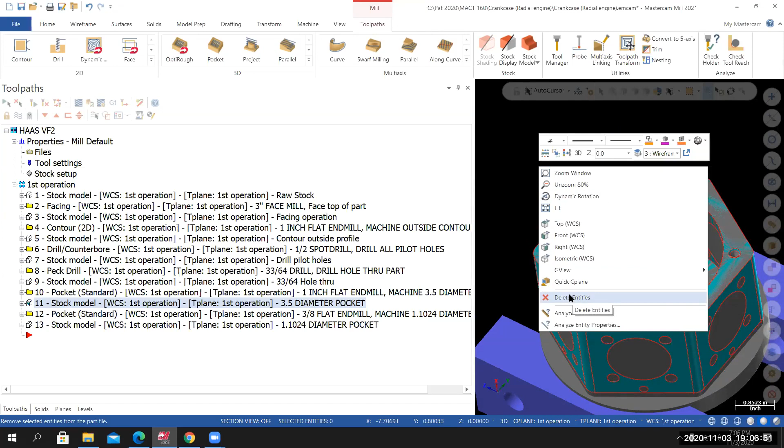So I'm looking at it from my isometric view. I will save my work and I'll toggle off the display of any visible stock models that are on my screen. What's going on here? There we go. Okay, so all the stock models are no longer visible. And I'll save my work.

All right, so from here, I'm going to use the same 3/8 diameter flat end mill, and I'm going to machine this pocket right here. It's not a pocket, it's a hole that goes all the way through the part, but I want a nice machined surface on this face right here. This is the face that we're going to set our origin off for the next operation. So I'm going to use a contour toolpath, and I'm still going to use this 3/8 diameter flat end mill.

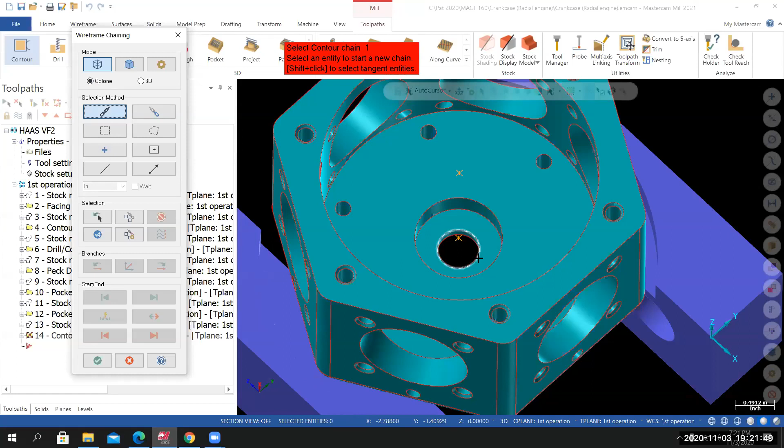I'll go to toolpaths, 2D, contour. Under wireframe chaining, mode is set to C-plane, and selection method, set it back to chain. And then select the top edge of this 0.531 diameter hole. I want the chain to go in a counterclockwise direction. I'll select OK. And that brings up the parameters for this contour toolpath.

I'll go to Tool. And we're selecting an existing tool in the tool list. I'll select the 3/8 flat end mill. The RPM is still good, but we'll need to recalculate the feed rate. So set the FPT to 1% of the tool diameter, so 0.375 times 0.01. It's calculating the feed rate at 34.38. Let's set the plunge rate to half the calculated feed rate. So 34.38, divide that by 2.

And from here, we'll need to provide some type of comment. So I'll borrow the tool name. I'll paste it down here. And let's say machine 0.531 diameter bore.

From here, the tool holder has already been selected. We'll go to cut parameters. The compensation type should be left. Stock to leave on walls is set to 0. Stock to leave on floors set to 0.

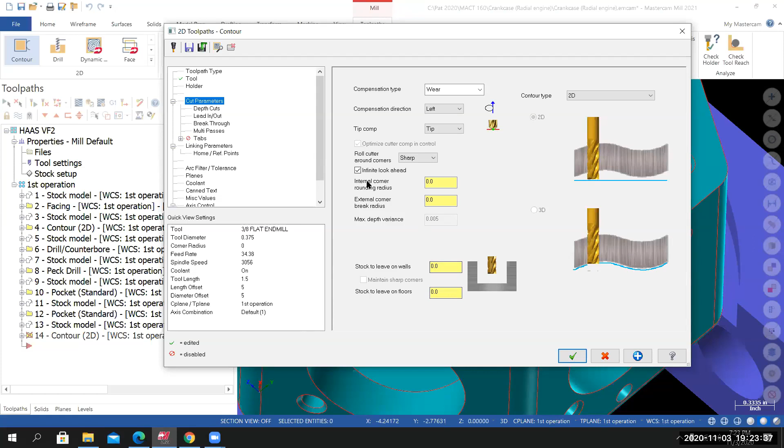I'm actually going to activate depth cuts because this is going through. You got to remember that we're actually going through the material. So this wall is going to be deeper than it appears here. So I've got depth cuts turned on.

Number of finish cuts for the depth, 0. I've got keep tool down checked. From here, I'll go to lead in, lead out. Now, this is a small diameter hole that's slightly larger than the tool that's going into it. So we might need to reduce these lead in, lead out values. Let's start by setting both of these to 10%. And then I'll carry it over to the exit.

For the breakthrough, I'll turn breakthrough on and I have it set to 20 thousandths. Multipass, I have multipass turned on. I've got number of rough steps set to 1, and then number of finish passes set to 1, with the spacing set to 0.0075. Everything else here, match your settings to what you're seeing here. Finish passes is at the final depth. And then I've got keep tool down checked.

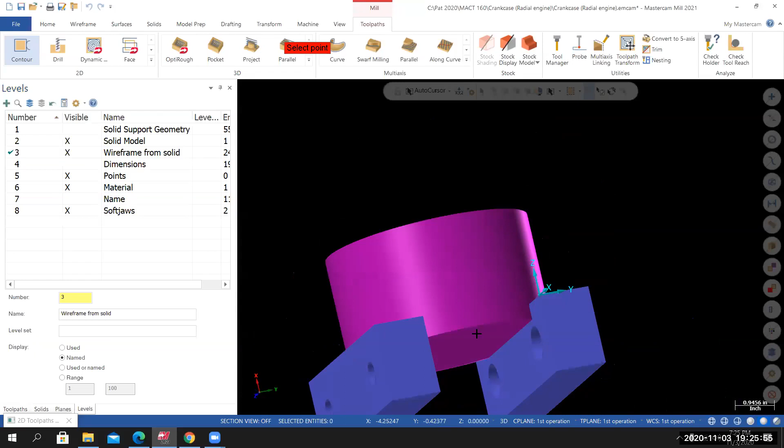So you could select the bottom face here of the soft jaw, or if you just go back to the level manager, make the material level visible. Select the bottom face of the material. I'll select OK. Now I need to make the material level invisible again. So I'll go back to the material level, turn it off. Now if I zoom in, it's doing several depths of cut, and then when it gets to the final depth of cut, it does its finish pass. So that's what I want.

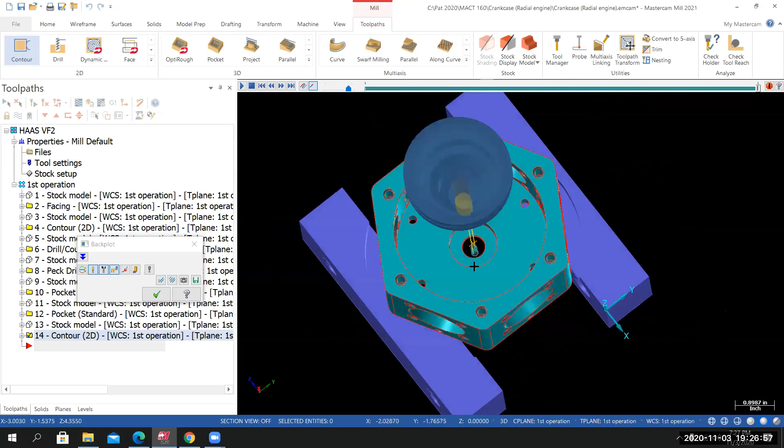With just that toolpath selected, I'll run it in backplot. Looks like we're okay. I don't see any rapid moves breaking out of the material or breaking out of the part. So I'll exit backplot. I'll toggle off the display of the selected toolpath. I'll select the entire first operation toolpath group. This would be a good time to save my work. And let's run the entire toolpath group inside of verify. So I'll select verify.

So inside of verify, make sure stop condition collision is turned on, and then run it. If I zoom in, you can see we've machined this bore out. I don't have any collisions. So the next thing we'll need to do is we'll need to drill, tap, and deburr. So from here, I'll exit verify. We'll need to make a stock model that reflects all the machining up to this point. Make sure the insertion arrow is at the very end of all your toolpaths.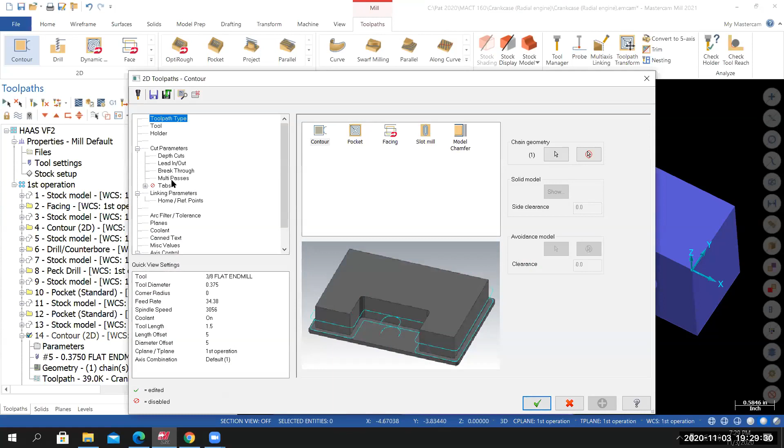So Tyler, you said, did we change anything in depth cuts? Let me go back to depth cuts real quick. We're going to depth cuts. No, I accepted all the default values on this one. I didn't change anything. And a lot of these settings were just carrying over from the other contour toolpath that we used. So from here, I'll select OK.

I'll minimize that contour toolpath. Now I have a stock model visible on my screen, so I'll select it. And then I'll toggle off the display. I'll look at it from an isometric view. And once again, I'll save my work. From here, we need to drill. We already have the pilots. So we'll need to drill, tap, and then break any sharp edges that we might have created with the other toolpath.

So I have a drilling operation already in this toolpath group. In my case, it's toolpath number 6. And it's already got 6 of the points needed added to the geometry. So let's do this. You should only have one drilling operation in this toolpath group. Select it. You have a green check next to just that toolpath. Right click, copy. And then down at the very bottom, insertion arrow at the very end, right click, paste.

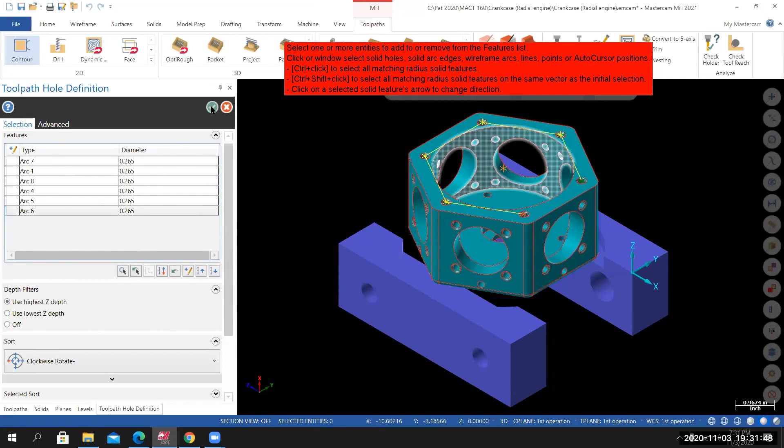From here, go to parameters, go to tool. We're going to add a number 7 drill to our tool list. Select library tool. The filter is active, so I'll select filter. In the diameter, so we're looking at drills. In the tool diameter, set it to equal. And if you know the diameter of a number 7 drill, it's 0.201.

But if you don't know, you can type in Shift #7. So #7. And if you hit enter, it knows that it's a number 7 drill with a diameter value of 0.201. You can do that with any letter size drill or any wire size drill. So you type in pound the letter or pound the wire size. So this is a number 7, #7. And it brings up the diameter value for that particular drill.

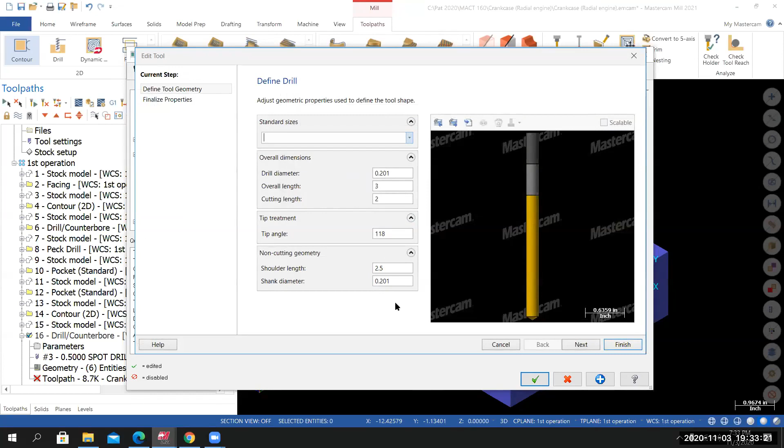From here, I'll select OK. I've got one tool that fits that description. I'll double click on it. It's added to my tool list as tool number 6. I'll need to edit this tool. So right click on it, select edit tool. Things that we can change here. Set the shoulder length to 2. So our tool projection will be 2 inches.

Go to the next page. Set the number of flutes to 1. Calculate the RPM. You see the RPM is being calculated based off of this 150 SFM, and this is a rounded version of it. Turn the coolant on, select show more options, select coolant, and then set the flood coolant to on, and then select OK. From here, I'll select finish.

The RPM is good. We'll need to update the feed rate. Set the FPT. It's a drill, so think of it as FPR. Set that to 2% of the tool diameter. So 0.201 times 0.02. It's calculating my feed rate at 11.457.

From here, we'll update the comment. I'll copy the tool name. I'll paste it down in the comment field. Say drill holes for quarter-20 threads or quarter-20 tap. That'll complete all the changes that we need to make here.

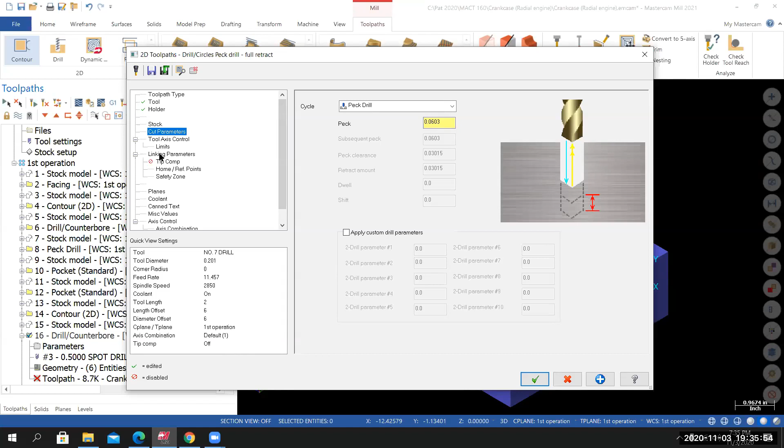From here, go to cut parameters. It should have changed over to a peck drill cycle, peck increment being equal to the drill tip length. Go to linking parameters. The clearance and retract, these are all carrying over from the previous toolpath. These should be good. Top of the stock, it should be good. If you don't trust it, just select top of stock and then pick select something that represents the top of the part or the top of the hole.

For the depth, I have it set to absolute. I'll select depth. If my model is correct, I should be able to pick select the bottom of the drilled hole. And I'm selecting the diameter at the bottom of the hole. I'll need to activate tip comp. I'll select tip comp. I'll turn it on. In this particular case, because it's a blind hole, I don't want to use additional breakthrough. So I'll set the breakthrough amount to 0. And that'll complete all the changes I need to make to this toolpath. I'll select OK. I'll regenerate the dirty toolpath.

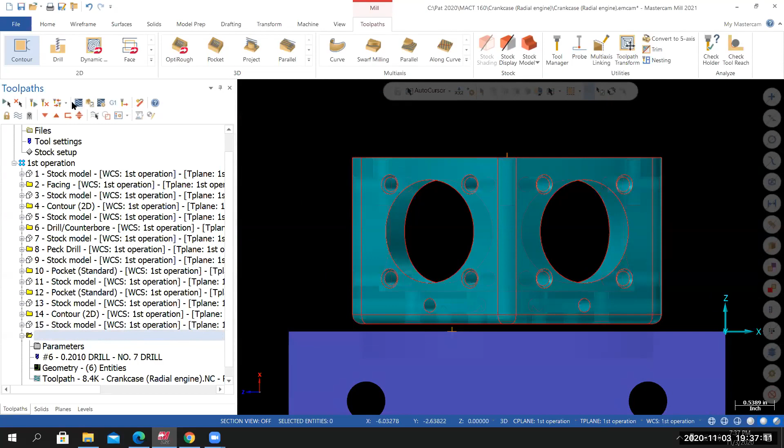I'll look at it from a front view. I'll turn translucency on. And now with just that new toolpath selected, I'll run it in backplot. And instead of just hitting play and letting it run out, I'm hitting the S key. And I'm checking. I can't quite see it. So if I look at it from a right side view, I'll even get out of the translucent. I'll go over to the wireframe view. There we go. So there it's going to its full depth.

Look at it from a front view. And now the profile of the hole matches the profile of the drill. So I'm just verifying that the full diameter is going to the correct depth. Once I see that that is correct, I'll select play and let backplot run out. Everything looks good. I don't see any issues.

So from here, I'll select the entire first operation toolpath group. I'll save my work. And then I'll run everything inside of verify. Once again, stop condition. Make sure stop condition collision is turned on.

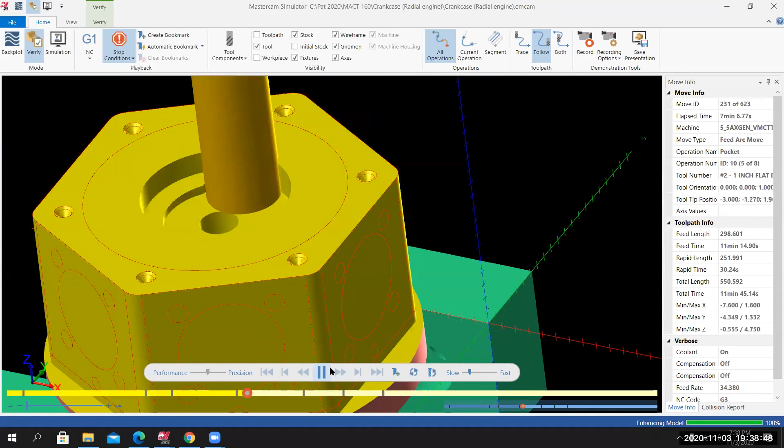Everything looks good. If you zoom into the hole, you can actually compare the machine model to the wireframe model. Everything looks good. From here, I'll close out of verify, and I'll make the stock model that represents all the machining up to this point.

Insertion arrows at the very end of the toolpath group. I'll go up to toolpaths, stock model. We'll call this one tap drilled holes. For the initial stock shape, we'll select that last stock model, 0.531 diameter bore. Actually, I think the last one was, that's correct, 0.531 diameter bore. For the source operation, let's select that new peck drill operation.

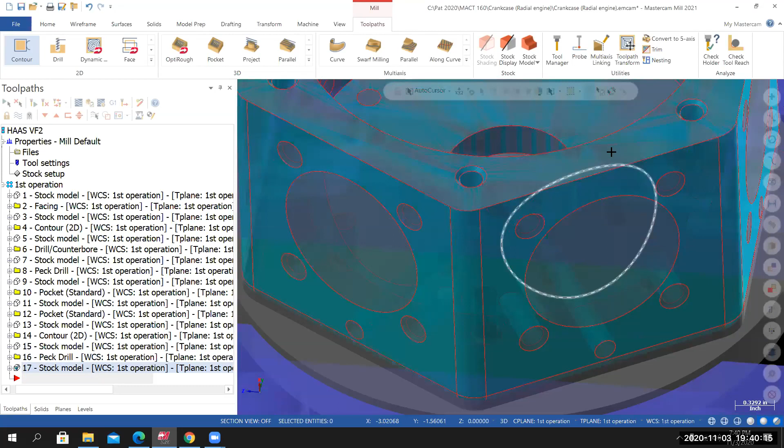I zoom in, see the stock model has the holes in it. So from here, to toggle off the display of the visible stock model, I'll select toggle display. We need to create a tapping operation. We're going to select the previous drilling operation. It's going to have the same geometry, same top of stock. The depth will change a little bit, but for the most part, all the settings have already been set.

So carefully select just the peck drill operation. Right click, select copy. Now, before you paste, make sure that you only had the peck drill operation selected. Next to the insertion arrow, right click, paste. You'll need to expand that new toolpath and then go into the parameters. The geometry is already good, so select parameters and then go to tool.

If you look at the call out for this thread, I'm opening it up there. They got plenty of them open. Quarter 20 UNC 0.5 deep. So we're going to tap to a depth of 0.5.

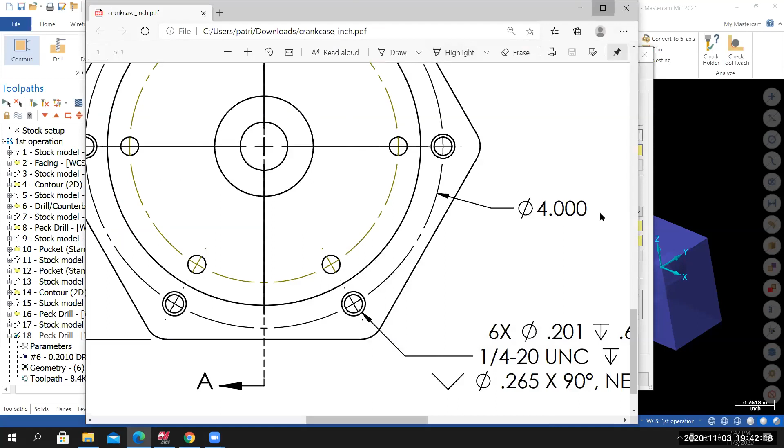And then, what I would do with the machine is I would actually tap one of the holes, measure the depth, and then adjust accordingly. So what this call out means is that they need a full thread depth of 0.5. They can't have partial threads. They need to have a fastener or a thread gauge go in to a depth of 0.5 for it to pass inspection.

So let's add a quarter 20 tap to our tool list. So select library tool, go to the filter, select none, and then you've got these two icons right here. You got tap right hand, tap left hand. We're using a right hand tap. Majority of the time, you're going to come across right hand taps, unless you're running spindles that might go on a car or something. So select right hand tap, select OK.

And I did something wrong. Go back to the filter. Right hand tap, set to equal to 0.25. And this will show us all taps that are equal to 0.25 in diameter. It should be 2. I'll select OK. Now I've got the quarter 20 and a quarter 28. The drawing is calling out for a quarter 20. So double click on the quarter 20. You can see it's added to our tool list as tool number 7.

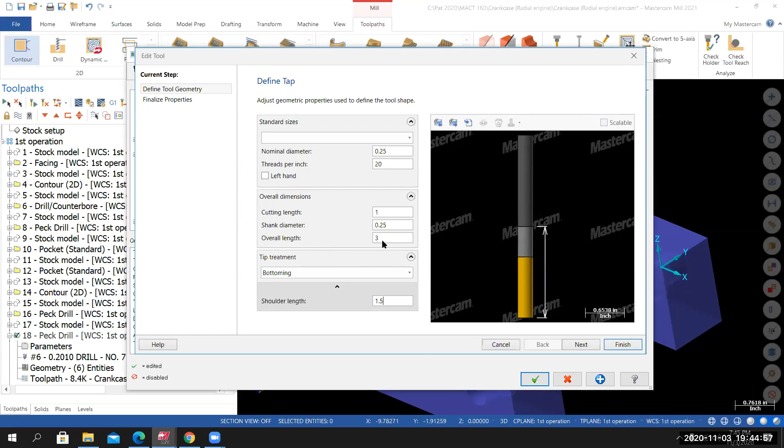Let's see, shank, cutting length, shank diameter, overall length. What is the gray? You have to press the arrow down there. Oh, gotcha. Oh, that's weird. So set the shoulder length, let's say to 1.5. So from here, I'll go to the next page.

Now, I don't use the calculator to calculate my RPM, and I'm not concerned about the number of flutes. But what I will do here is I'll turn on the coolant. So set the flood coolant to on. And then I'll select finish. Now with taps, depending on the material, I don't like to exceed, say, 500 RPM. I like to keep it underneath 500 RPM.

Several reasons, chip evacuation being one of the biggest factors when I determine my RPM. What Mastercam needs to do is synchronize the movement in the Z-axis for every revolution of the tool. What does that mean? So the pitch, the distance from one thread to the next, is 0.05. And to determine that, open up a calculator.

I've got a calculator opening up. So when you look at a thread and it says quarter-20, the dash 20, or the number on the very end of it, that represents the threads per inch. And to calculate the pitch, the distance from one thread to the next, you would take 1 inch, then divide it by the number of threads per inch, 20. So the pitch is 0.05.

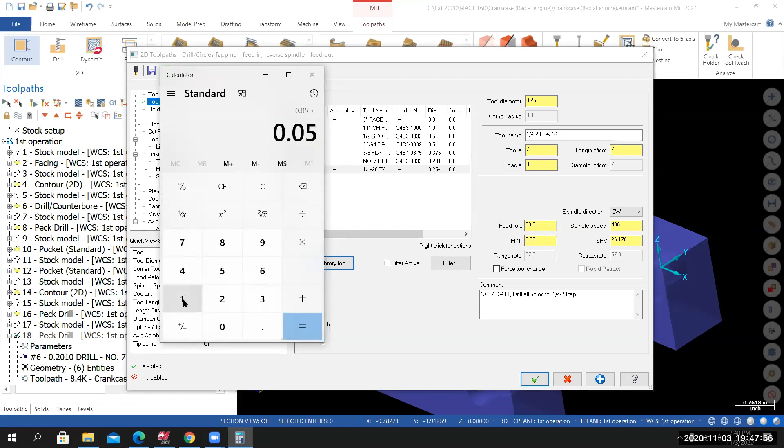This is what is determining the feed rate relative to the RPM, or the RPM relative to the feed rate. What Mastercam is doing is it's synchronizing the rotations per the motion in the Z. So for every rotation, it has to move 0.05 in the Z axis. So 0.05 times 400 RPM, 400 rotations. This is the distance it would have to travel in 1 minute so that the threads would be synchronized, and it wouldn't break the tap.

So probably a little bit too much information for this lecture. Just know that Mastercam is calculating the RPM, or the feed rate, based off of this FPT. So I like to keep my spindle speed under 500 when I'm tapping. I'm going to set my spindle speed to 200, my RPM to 200, and watch what happens to my feed rate. It's going to feed at 10 inches per minute. And we'll talk about this more next class.

It's getting kind of late. So from here, I'll borrow the tool name. I'll paste it down here. We'll say tap quarter-20 holes. I should have capitalized that.

From here, I'll go to the holder. I'll select a quarter-20 holder. So I'll go to Open Library, Cat 40 inch, open it up, C4C3-0032. So I'll select it, and then I'll set my tool projection to 2.

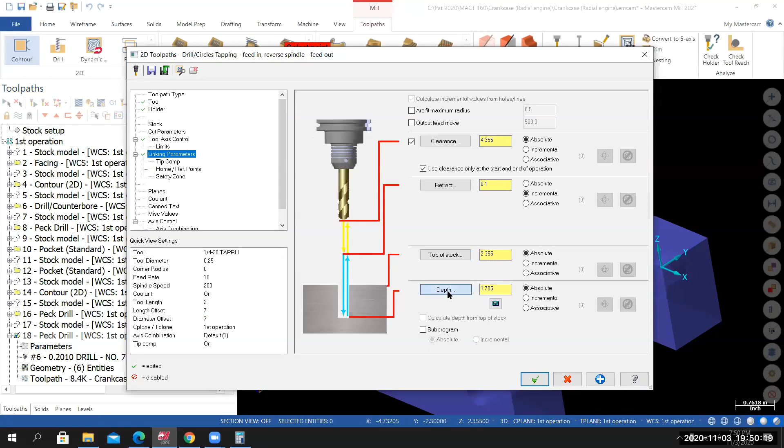Go to linking parameters. For the top of the stock, select the top of the hole. For the depth, now watch how I do this. It's set to absolute. For the depth, I'll select the top of the hole. Make sure you select the right hole. And then in this field, minus 0.5. And I'll hit enter.

For tip comp, I'm going to turn tip comp off. If you look, it's not going to give us any value because it's calculating the tip length at 0. So just turn tip comp off and then select OK. I'll need to regenerate this operation. So I'll select regenerate all dirty operations. With just that new toolpath selected, I'll run it in backplot.

Now it doesn't show true threads inside of Mastercam. And the only thing it's going to do is it's going to open the hole up to a 0.25 diameter. So I'm not seeing anything that's going to cause issues inside of backplot. I'll exit backplot. I'll toggle off the display of the toolpath. It's already toggled off. And then I'll select the entire first operation toolpath group and I'll run it in verify. Stop condition collision is turned on. And then I'll select play.

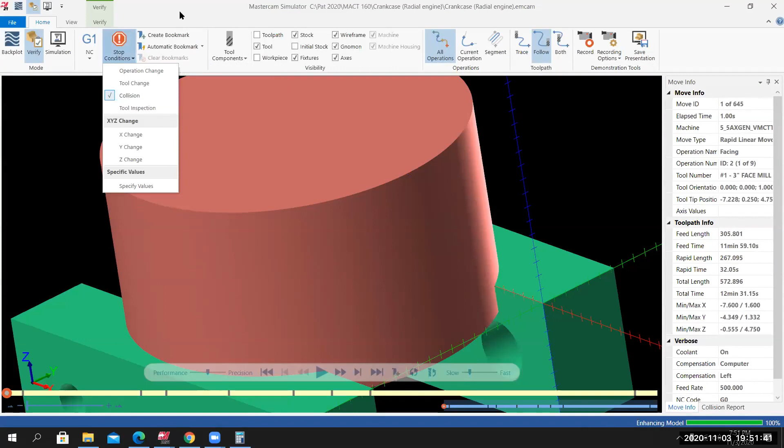All right, so from here, I can inspect the machined model to the wireframe model. If you zoom into the holes, you can see that they don't show threads. That's just Mastercam, but they are good. So from here, I'll exit out of verify. I'll look at my part from an isometric view. I'll fit my screen, and I'll save my work again.

And this is where we're going to stop for this evening. And next class, we will pick up with the deburring of the part, and we'll create any additional files that we'll need for the next operation.